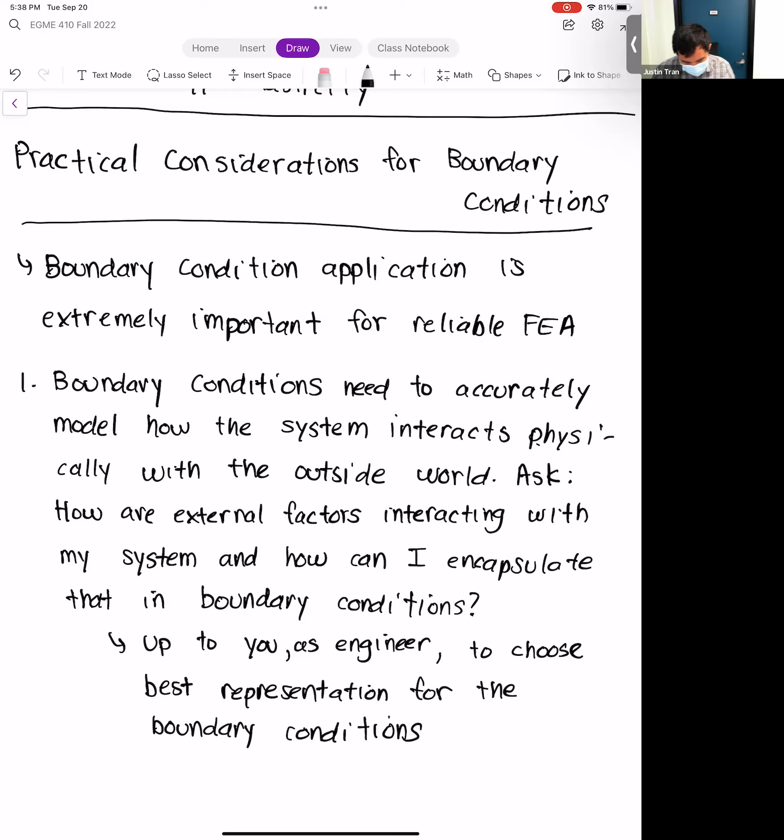This point is really important, and I want to stress this, because you can run a simulation without proper boundary conditions and ANSYS is not going to give you an error. As long as you satisfy the minimum requirements - at least one constraint boundary condition and maybe a load or another constraint - ANSYS will be like, fine, you can run whatever you want, don't worry about it. But you're going to run into a situation where if you apply the boundary conditions incorrectly, your simulation is not going to reflect the physical result.

Those are even more difficult to catch, because ANSYS is not going to tell you that this doesn't match reality - ANSYS doesn't know better, it's just a computer. So it's really up to you, and you have to be the judge of what the best boundary conditions are, and the judge of whether the results make sense relative to the boundary conditions.

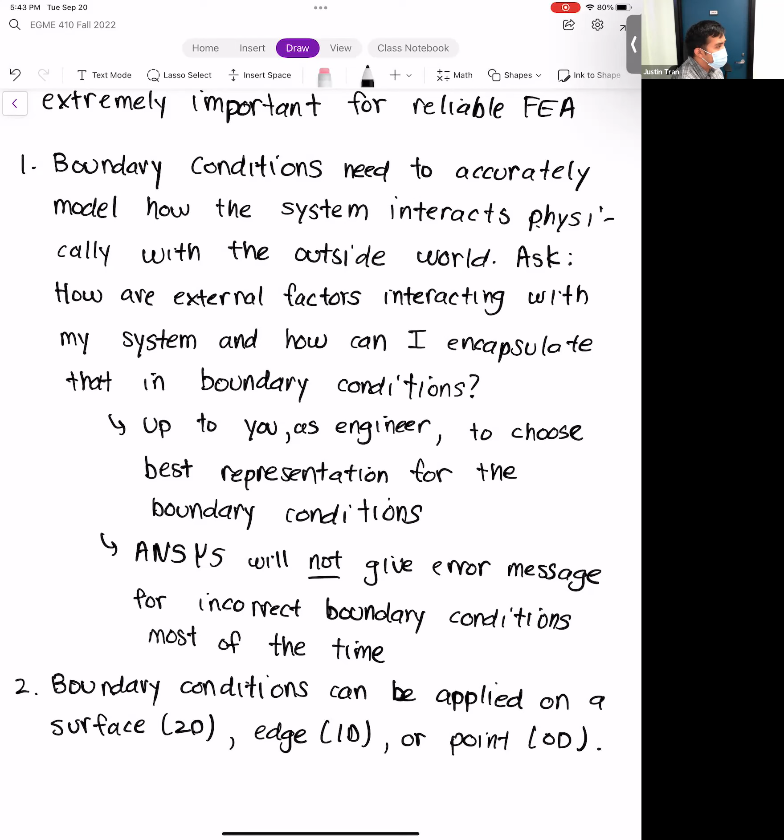That applies to all types of boundary conditions—all the constraint type boundary conditions as well as all the load type boundary conditions. Generally speaking, most of the time you want to apply the boundary conditions on as wide an area as possible. Applying a boundary condition on a surface is preferable to an edge, and applying a boundary condition on an edge is preferable to a point.

Surface is greater than edge, which is greater than point.

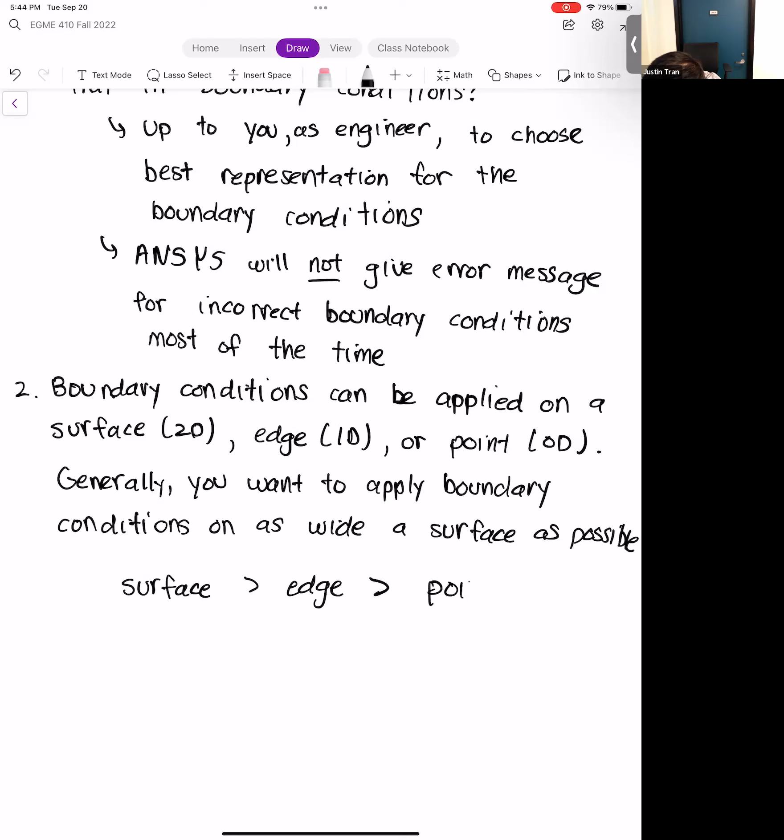The reason for that is a bit hard to get into right now, but basically you get more stable and better quality results if you can apply that over a larger area. That's not to say there aren't situations where you want to apply a boundary condition on an edge or a point—it's just that generally, if you can avoid it and apply the boundary conditions over a 2D surface instead, that's preferable.

All right. And yeah, that's it. Any questions on this?

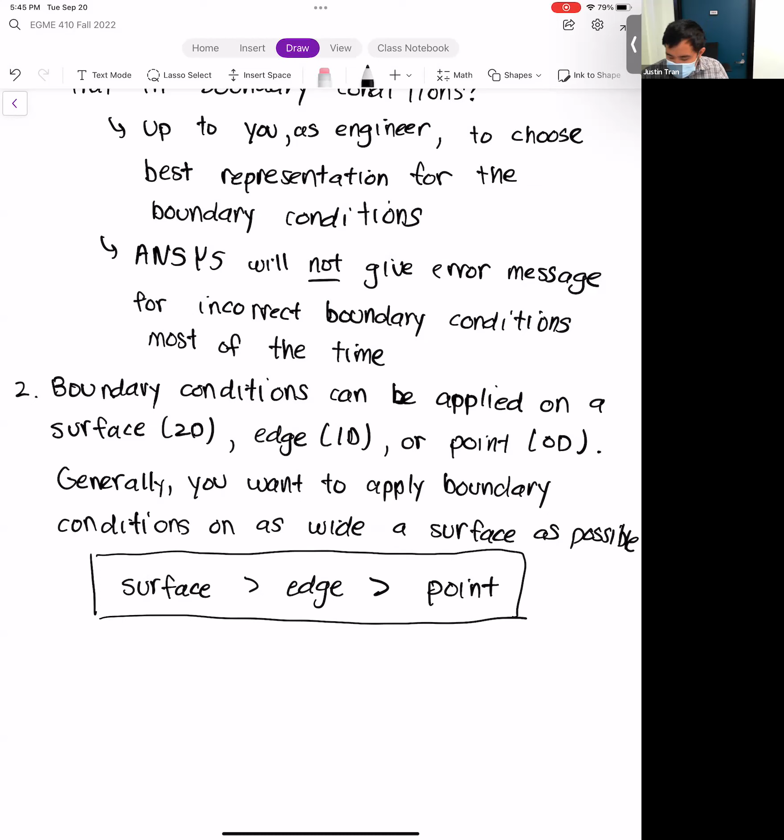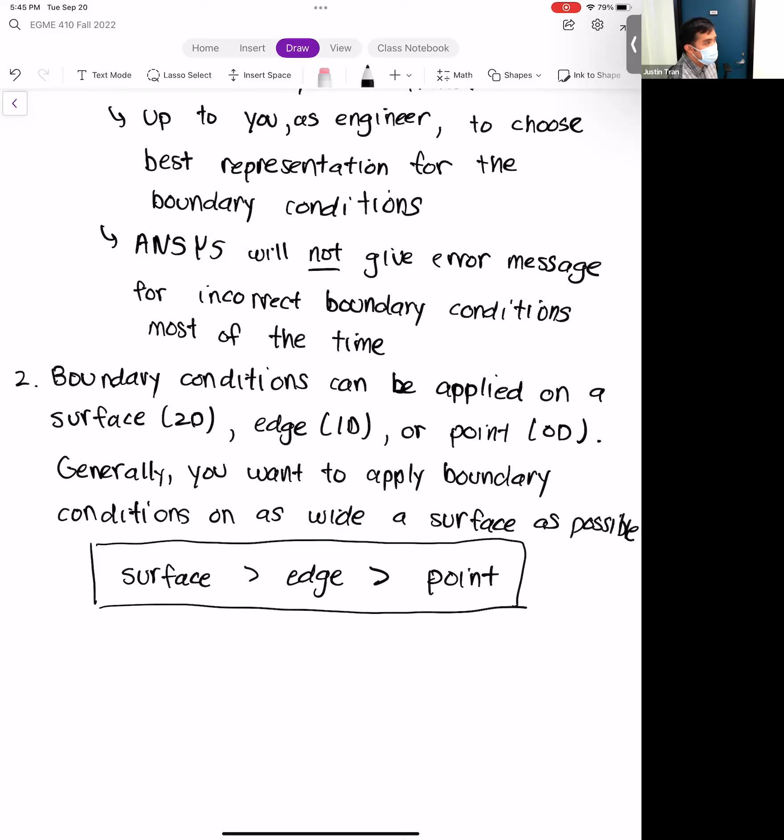I want you to think about these two points, especially when it comes to boundary conditions. For activity 3, I think I tell you what boundary conditions to apply, so it's a bit different than activity 2 where you make it up on your own. But it's still good to think about, because I'll be the first to tell you that in activity 3, the way the boundary conditions are modeled, I wouldn't exactly say they're the best considering what they're meant to represent—especially things like weights or the wind force. I think there are better ways to do that, so definitely think about these as we do activity 3.

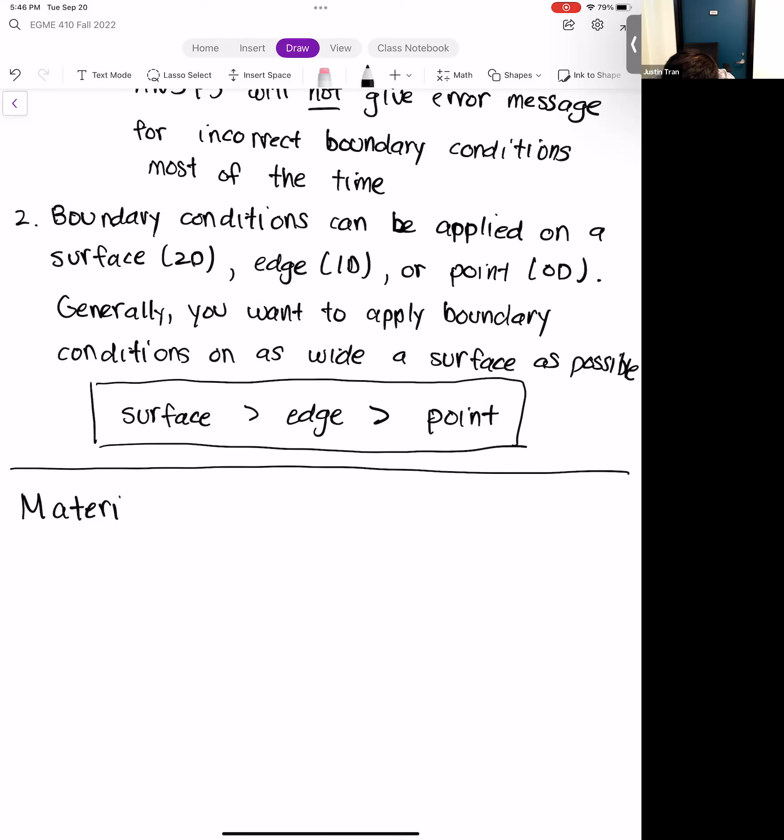All right, so the last piece of the puzzle, in terms of ANSYS basics that you should know for every kind of ANSYS job, are material properties. We've talked about material properties a bit before, but I want to formalize it into a lecture so we can discuss some of the finer points and more nuanced aspects, especially some of the alternate material models that are out there. Even though we're going to mostly be working with linearly elastic isotropic materials, I want to make you aware of some of the other tools out there in terms of material properties.

All right, so first let's define them. Material properties refer to the physical parameters of the material that affect how it responds to physical loading.

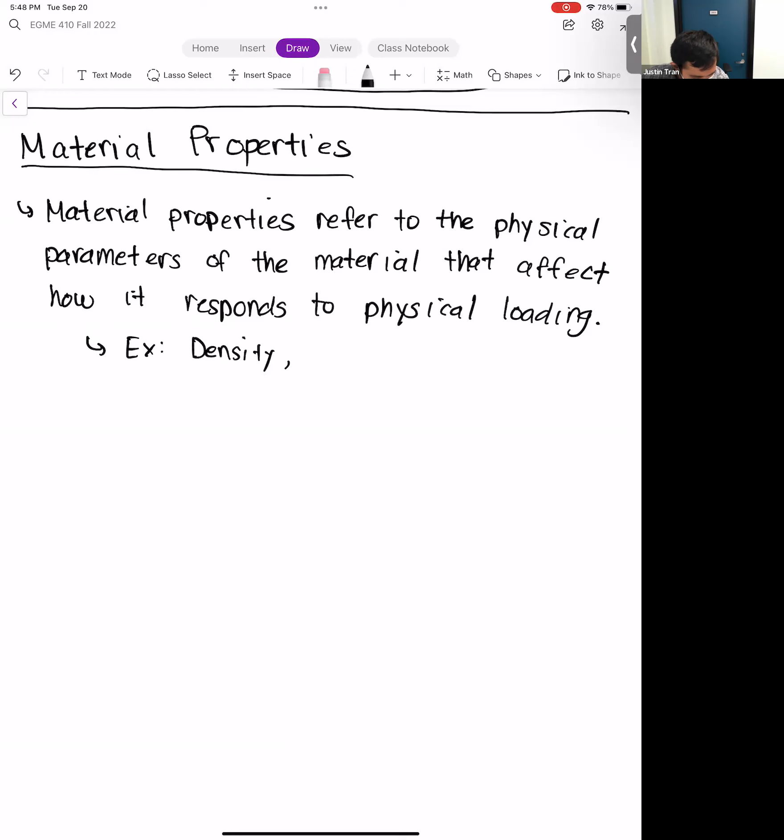It's important to distinguish that when I talk about material properties, I mean properties that are inherent to the material itself. Usually these are called intrinsic properties, which are properties that don't change depending on how much mass or volume you have of something.

One example of this would be the difference between mass and density. The density of a pound of aluminum is going to be the same as the density of 1,000 pounds of aluminum, because density is a property that's intrinsic to aluminum itself. Whereas the mass of a pound of aluminum is going to be very different than the mass of 1,000 pounds. These are properties that are intrinsic to the materials and don't really have to do with the shape, geometry, or amount.

Mathematically, the reason we need to input these properties for finite elements is that material properties are used in the governing differential equations. Things like the density, the Young's modulus, and the Poisson's ratio all enter into the governing equations. And thus, as ANSYS solves the governing equations, the material properties are going to affect the solution.

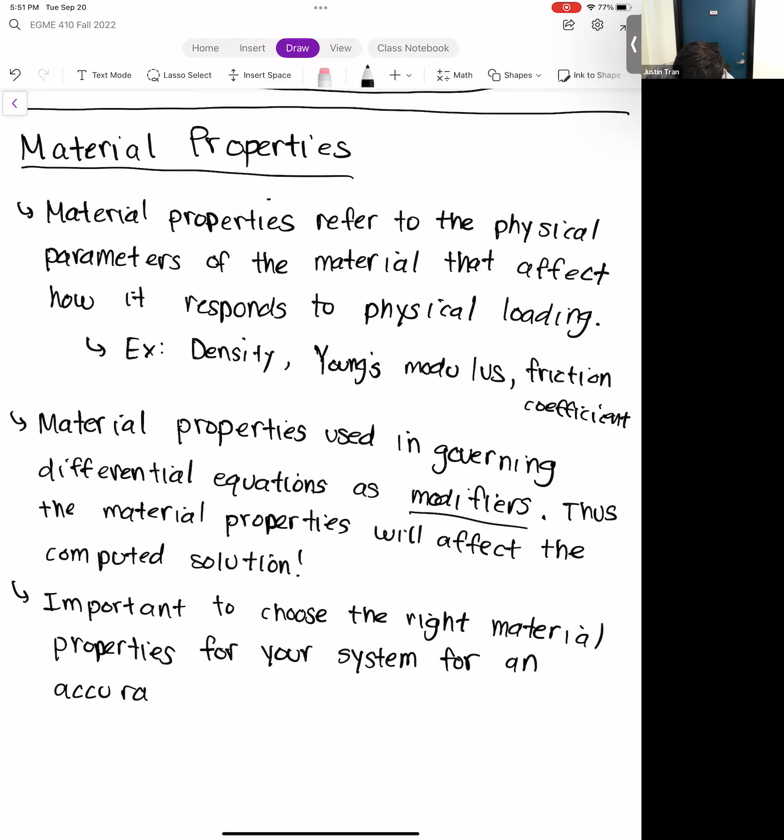We haven't done too much with material properties yet in our first two activities. For our first activity, we just used the default one in ANSYS, structural steel. And in the last activity, we just input a very simple metal, aluminum 6061. But material properties actually goes a lot deeper than that. When I say choose the right material properties, it's a lot more than just choosing the right Young's modulus and the right Poisson's ratio, because that's the simplest material you can have. In addition to choosing the right property values, you also have to choose the correct, most physically realistic material model.

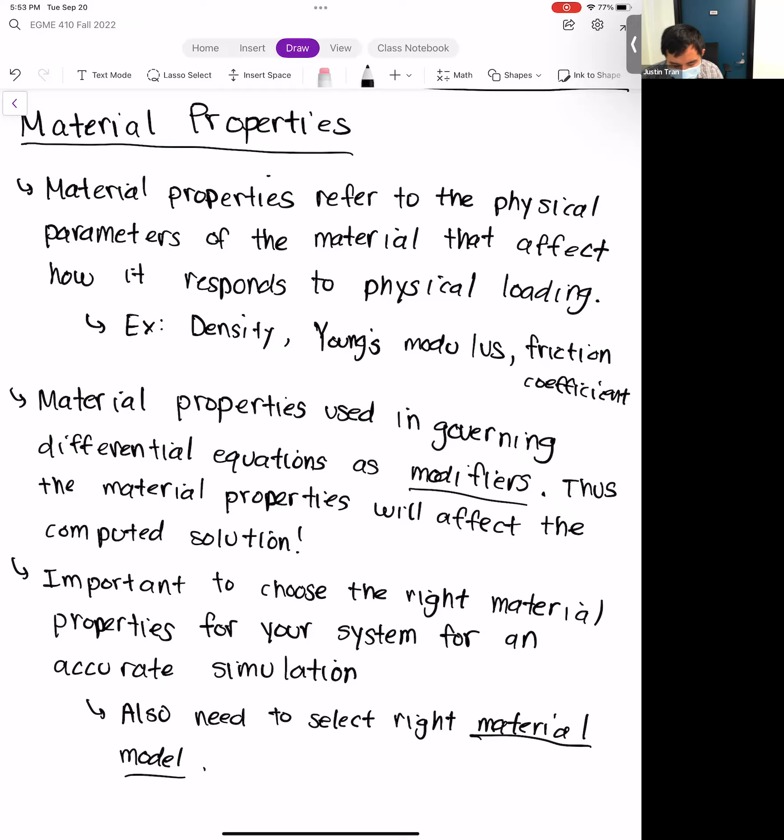We'll talk a bit more about what material model means, but basically there are different mathematical representations for how to model or capture a material's behavior. We've talked about linear elasticity quite a bit in this class, and that's one such material model, but there are others out there. For this class, we're going to talk about things like anisotropy - an anisotropic material - we'll talk about plasticity, and probably something you may or may not have heard of called hyperelasticity as well, which is another type of material model out there.

If you really want an accurate simulation and your system's going to be exposed to adverse temperatures, either very high or very low, it's important to capture those temperatures as well. It's actually very common to run a thermal simulation right alongside a structural simulation, so you can have those dynamic changes in temperature, and those will actually change the material properties in real time as well. That's something that's used quite a bit.

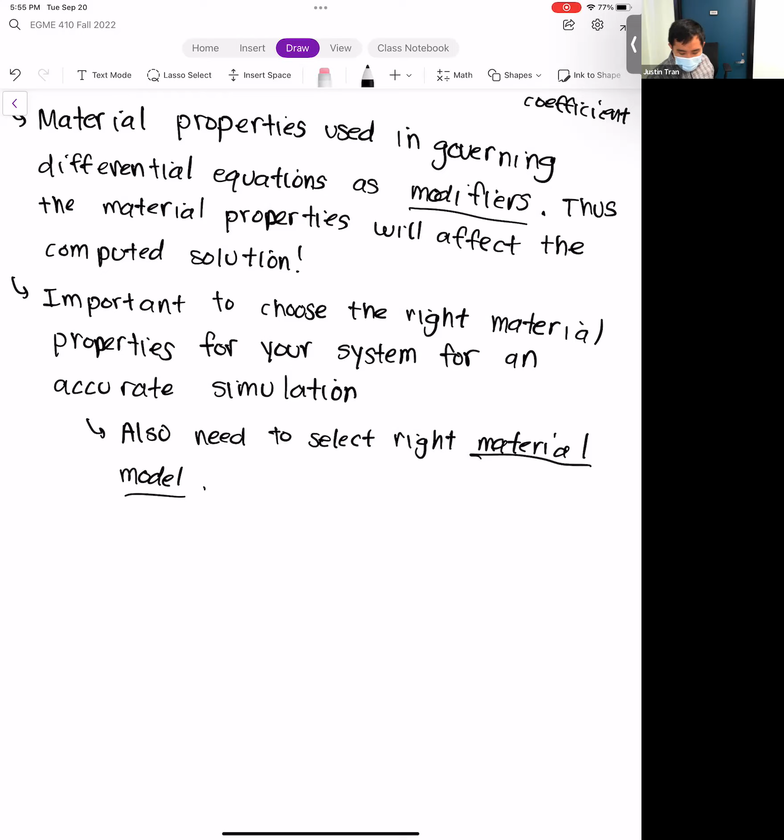Any questions on this?

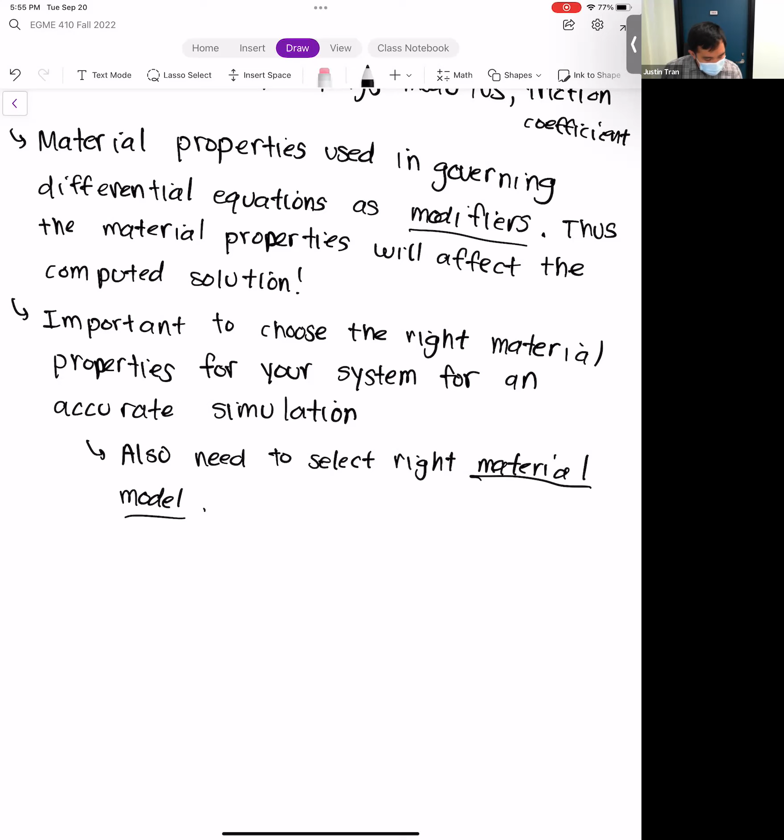All right, so let's start going over the different material models and what you need to specify for each of them. Let's start with our favorite one, the one we'll be using for most of this class: linear elasticity.

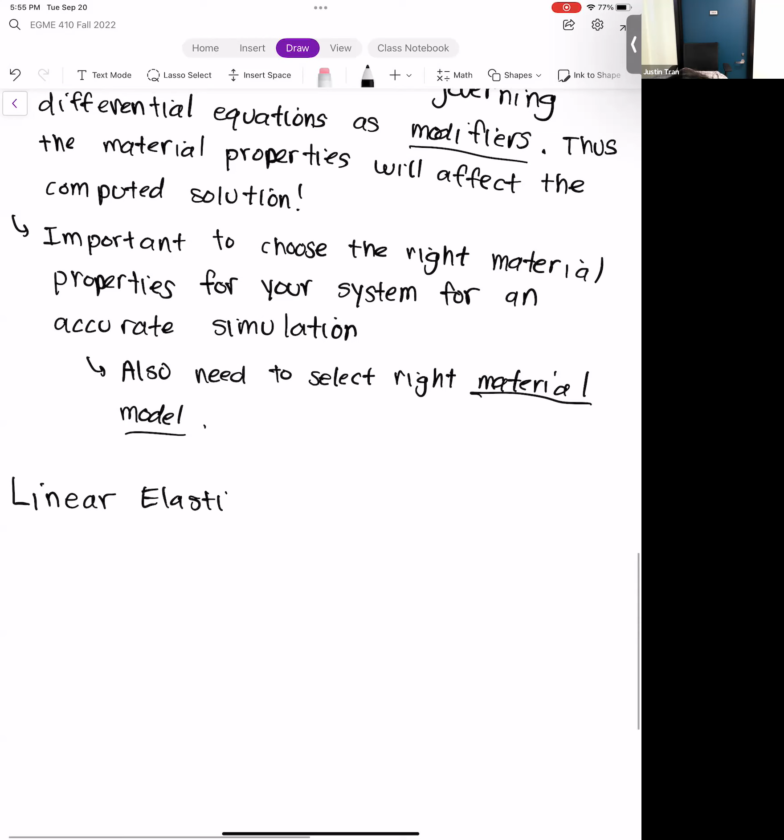Linear elasticity—I think this may be the third time we've talked about this in this class—refers to materials where the relationship between stress and strain is purely linear. It's the simplest one out there, and that's kind of why we use it. In terms of the number of parameters you have to specify, linear elasticity has the smallest requirements.

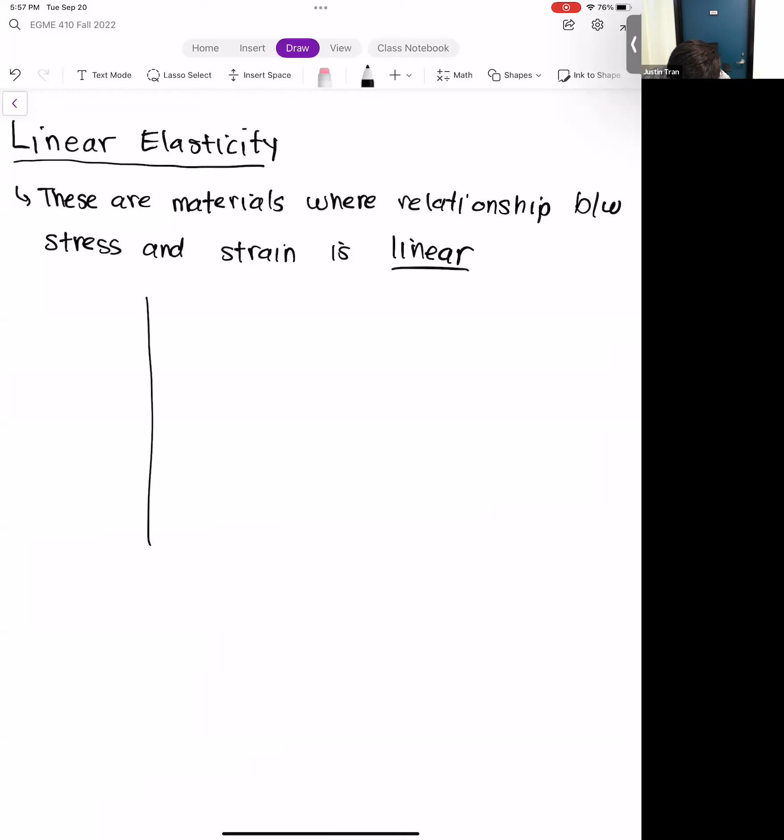Graphically, let's go ahead and draw the graph. You've probably seen this a million times now, but a linear material model looks something like this: we have stress on the y-axis, strain on the x-axis, and the relationship is just a line like that. The slope of this line is the Young's modulus, E.

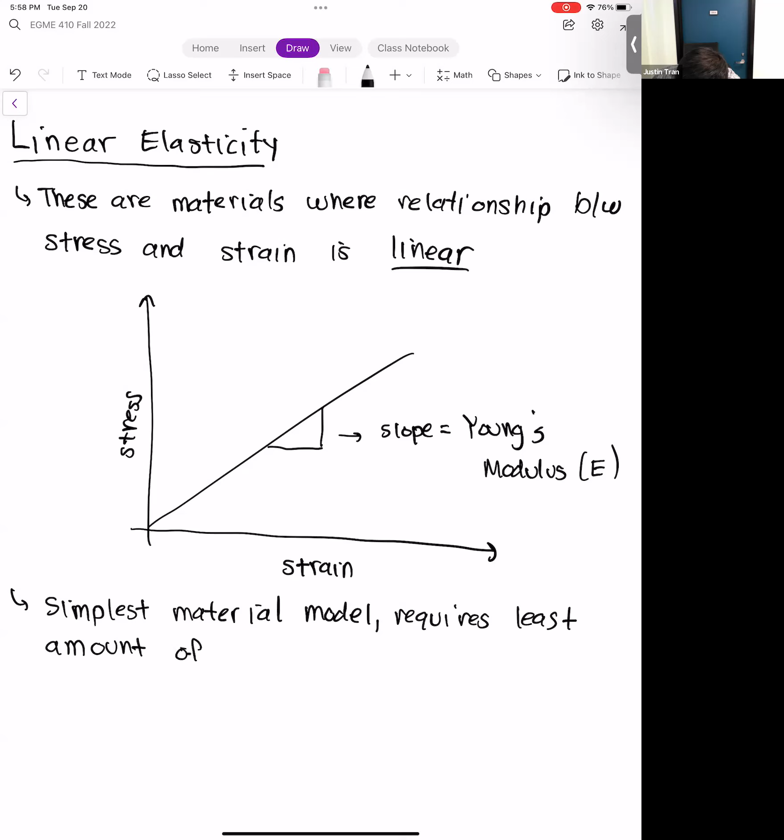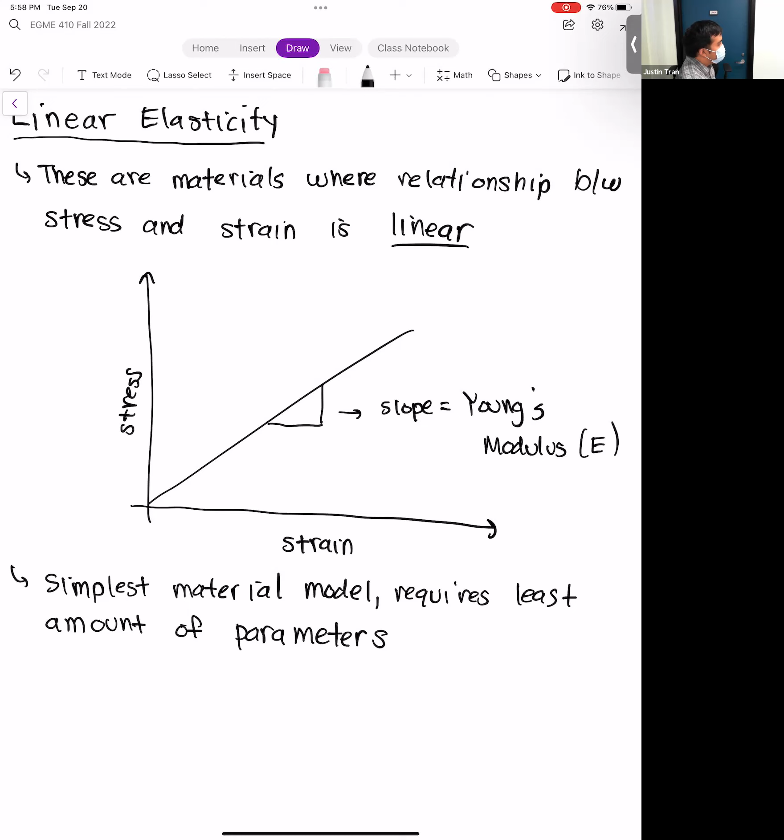Like I mentioned, it's a popular one to use, especially when you're first learning ANSYS and first learning about structures, because it's the simplest. You really only have to specify two different material parameters, which we did in Activity 2. Let's go over what those parameters are and what they represent.

So let's do the Young's modulus first. The Young's modulus is E. Just like I mentioned above, the Young's modulus is the slope of the stress-strain curve, and what it represents is how well the material can resist deformation.

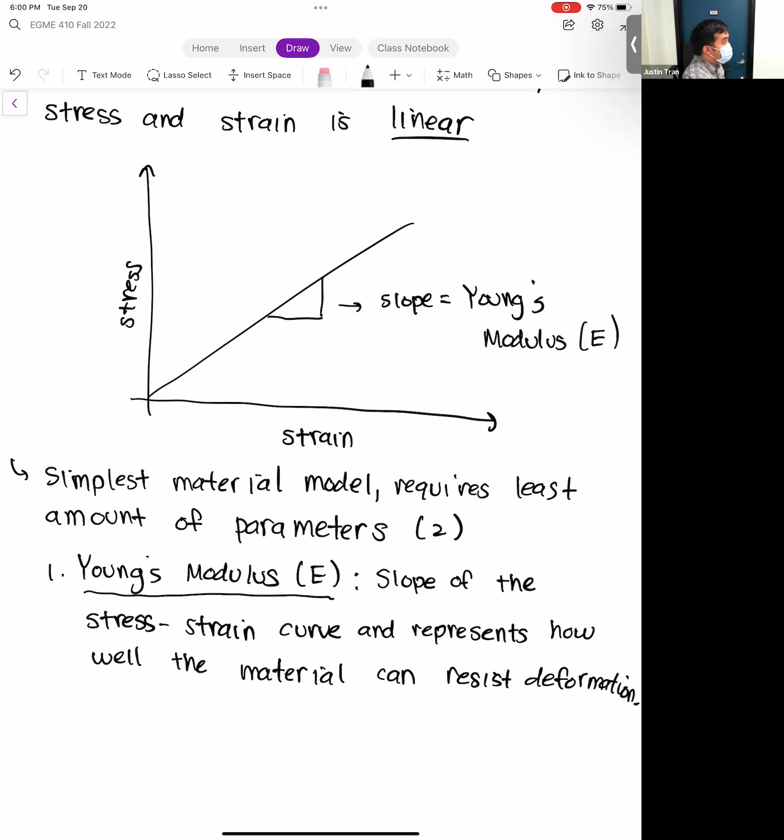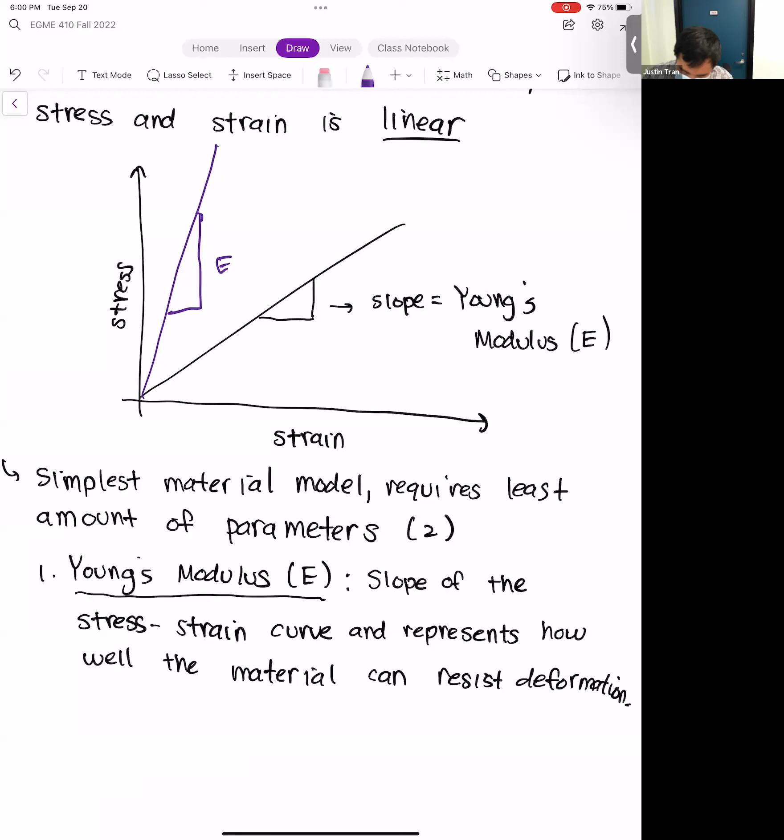We use the Young's modulus as a measure of material strength. A material with a higher Young's modulus we associate with being a stronger material. Intuitively, if you look at the graph, if you have a material with a much higher slope—let's say we have a material with a relationship like that, where the slope of this line is much greater than the black line—that means in order to cause a similar amount of strain, you're going to need a much higher amount of stress, and much higher stress means more load or a higher amount of load. So if you have a higher Young's modulus, that means you have a much stronger material.

As an example, using two metals you're probably familiar with: steel we generally regard as a very strong material, and steel has a Young's modulus of about 200 gigapascals. Whereas copper, we all consider to be a much softer material, has a much smaller Young's modulus of about 130 gigapascals. Generally, when you're thinking about the strength of the material, how well it can resist deformation, we rate that based on the Young's modulus. Any questions on that?

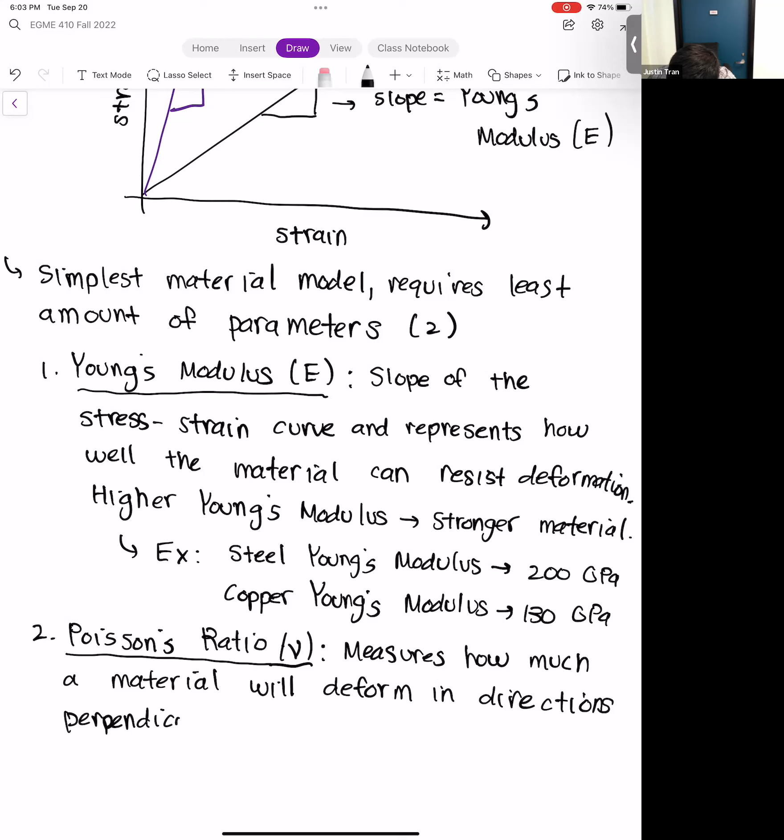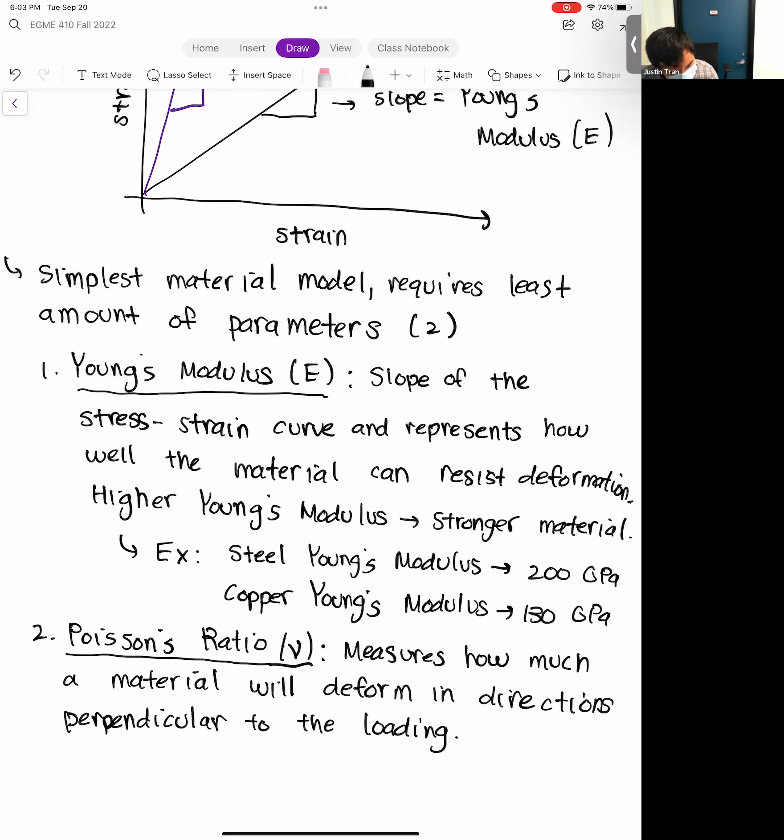Because oftentimes, when you have a 3D part or a 3D geometry and you apply some loading in one direction, because of conservation of mass, you're going to have deformation in directions that are perpendicular to it. I'll draw a picture to explain that in a second.

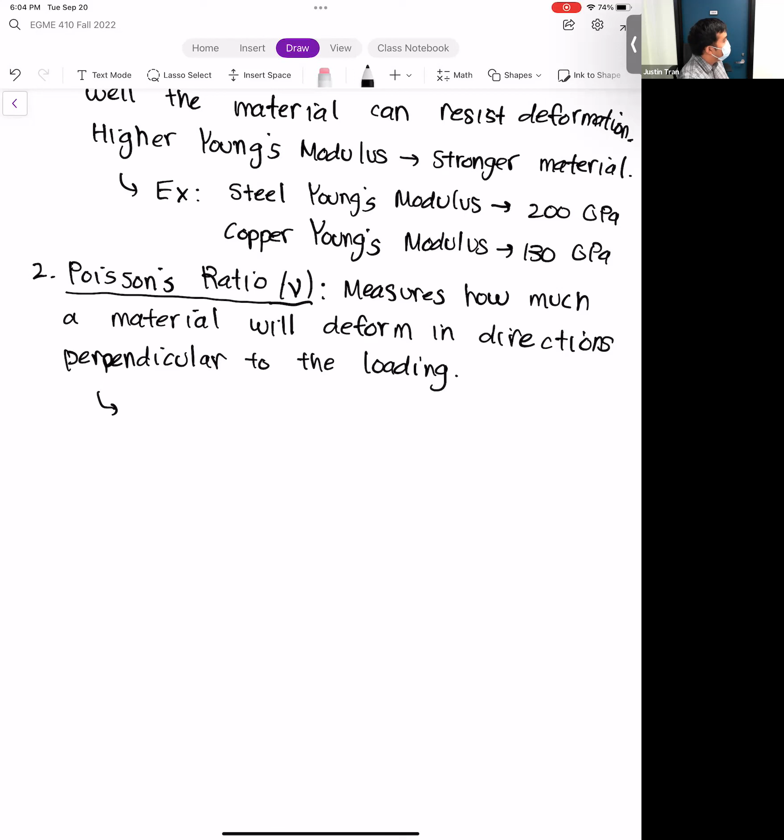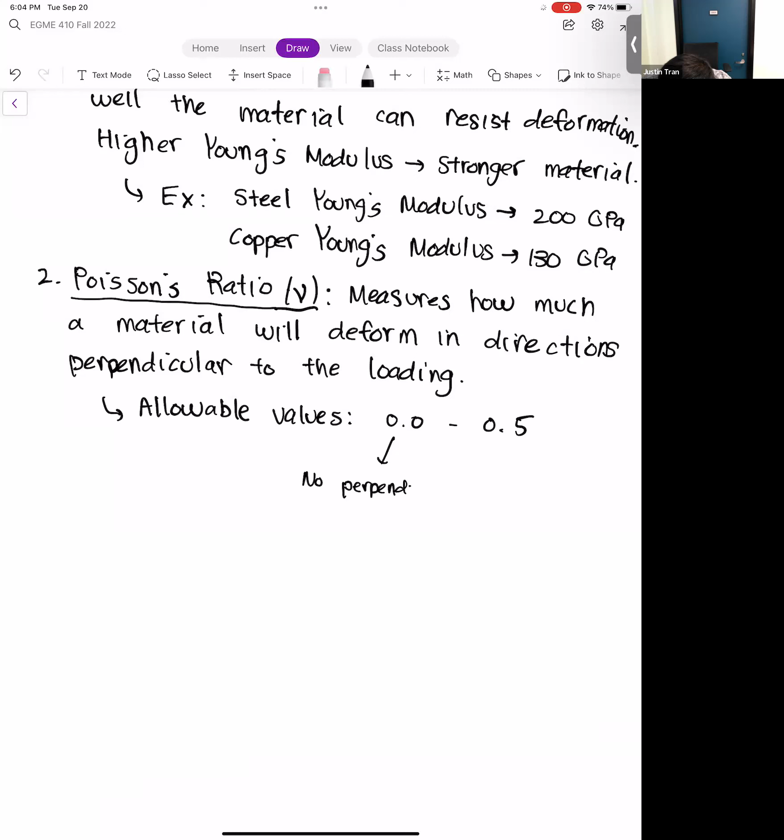But let's define the units for Poisson's ratio. First of all, there are no units, since it's just a ratio, so it can be something between 0 and 0.5. If you have a Poisson's ratio of 0, this basically means that you have almost no perpendicular deformation, whereas a value of 0.5 means lots of perpendicular deformation.

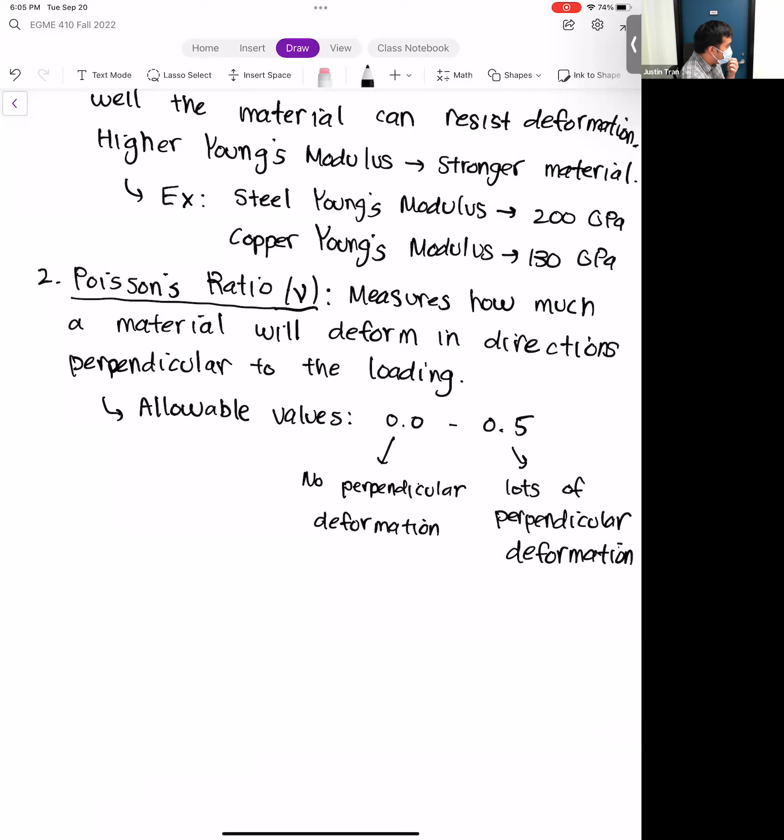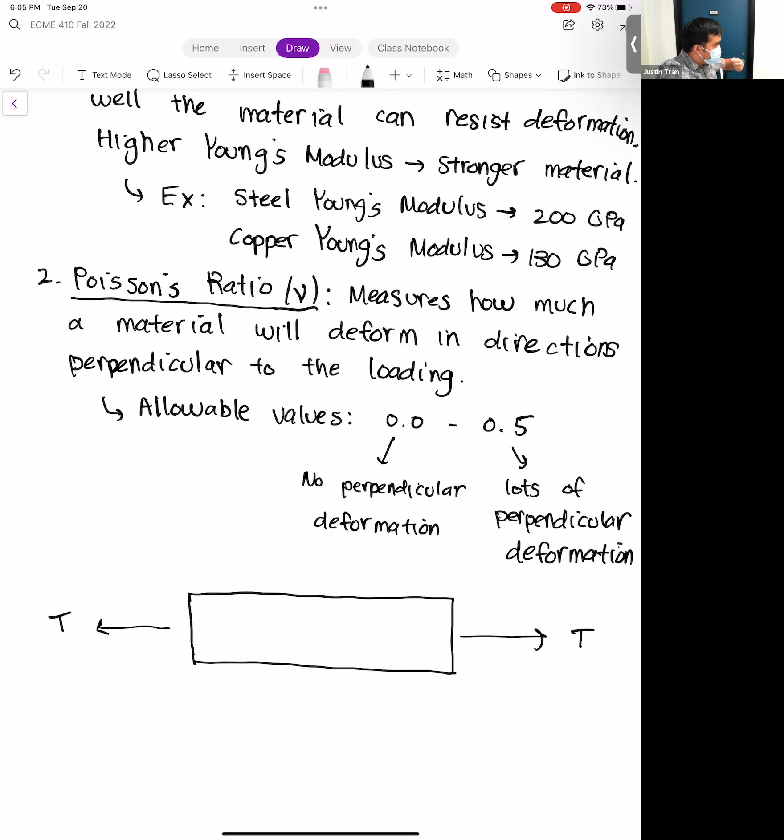Okay, so let's do a quick illustration of this. Let's say that we have a bar, I guess it's a rectangle. Let's pull on the bar in tension, so we're taking our bar and just kind of pulling it apart, similar to our first activity. So what we generally expect is that after we apply this force, because the force is tensile, then we expect our rectangle here to elongate.

So we have an elongation due to loading. The elongation is a deformation that's in the same direction, or parallel to the loading, because the loading is going left to right here, and elongation means deformation in that same direction. But in order to satisfy conservation of mass, what needs to happen is that there needs to be some deformation perpendicular to that occurring as well.

You can't just stretch a piece of material and expect it to stay the same width, because otherwise that's going to violate conservation of mass. So to compensate for the fact that the overall length is getting longer, parts of the geometry are going to get skinnier, to compensate for that loss of mass. The degree to which you see the material get skinnier, and how localized it is or not, depends on the Poisson's ratio.

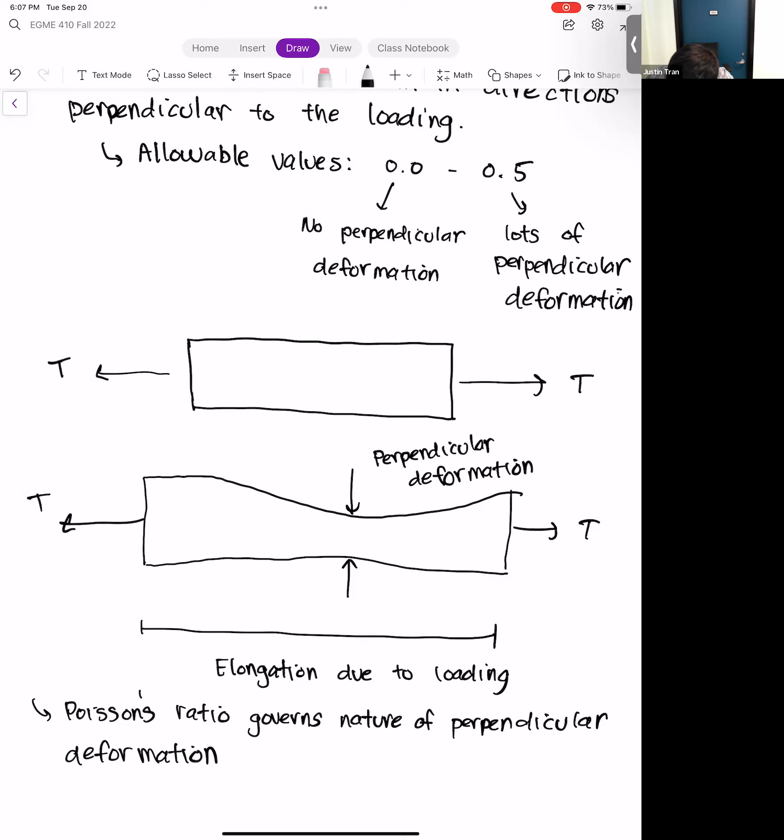Okay, so that's Poisson's ratio there. All right, any questions on Poisson's ratio?

Would a material with a Poisson's ratio of 0 still be able to elongate? That's a great question, and that would be probably a better question for one of the other structural faculty.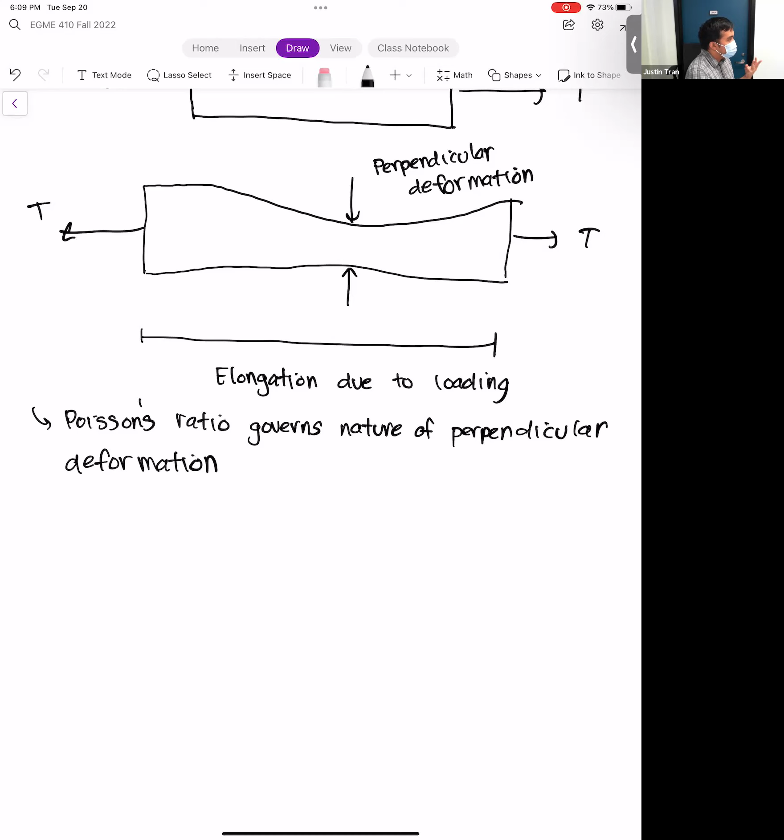All right, so those are the two main properties that you have to specify. If you think back to activity 2, when we were specifying the material properties for aluminum, these are the two that we specified. There's actually a third material property for linear elasticity that no one really talked about—it's like a forgotten cousin—and that is called the shear modulus.

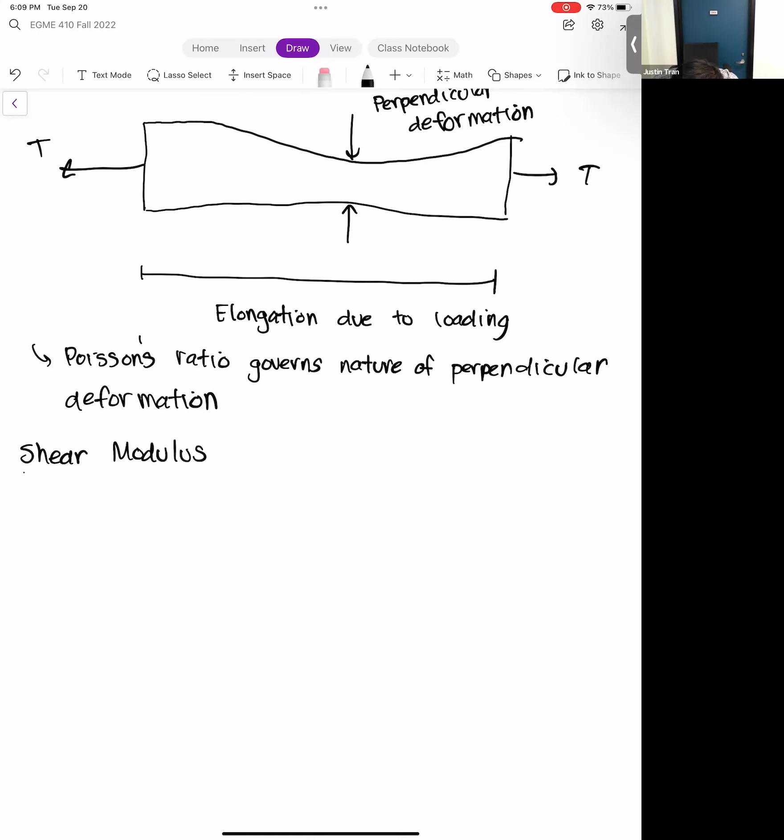So the shear modulus determines how strong the material is, or how much the material resists shearing deformation.

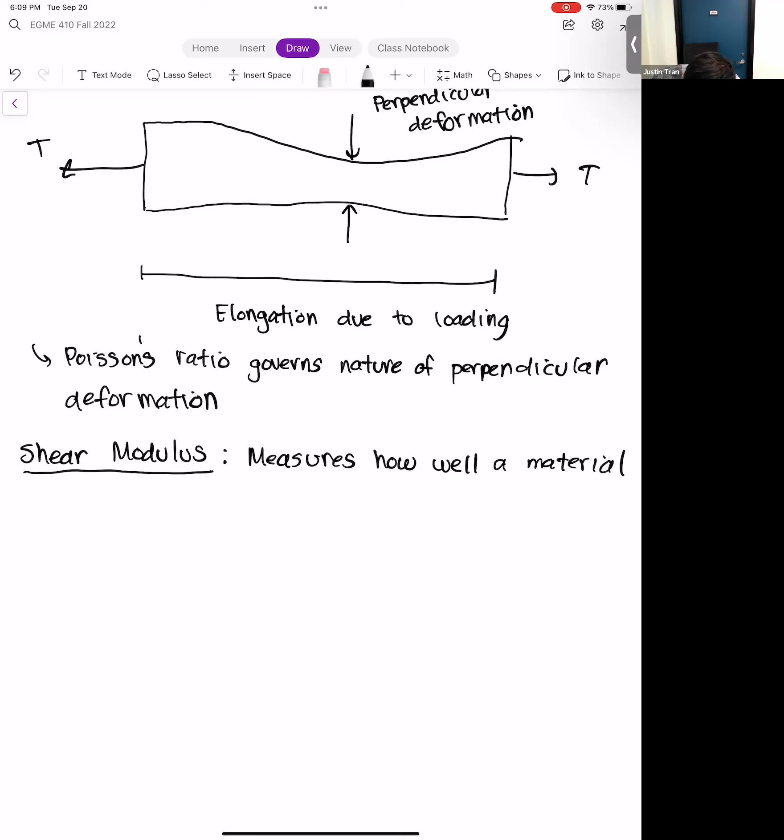Once again, because we're working with three-dimensional objects most of the time, there are certain situations where our materials will be loaded in shear. The shear modulus tells you how well the material can resist shearing forces. The reason we don't really talk about the shear modulus too much is that if you have an isotropic linear elastic material, you can compute the shear modulus based on the other two properties.

Okay, and so the symbol for shear modulus is G. And G is computed as E, which is the Young's modulus, divided by 2 times 1 plus nu, the Poisson's ratio.

Some of you might have noticed this when we did activity 2. When we were specifying the material properties for the aluminum, we only did the Young's modulus and the Poisson's ratio. There was actually another entry there for the shear modulus, if you look a couple rows down. But what you probably saw is as soon as you entered the properties for the Young's modulus and the Poisson's ratio, the shear modulus gets automatically calculated based on that formula. So because this formula exists, we only have to specify E and nu.

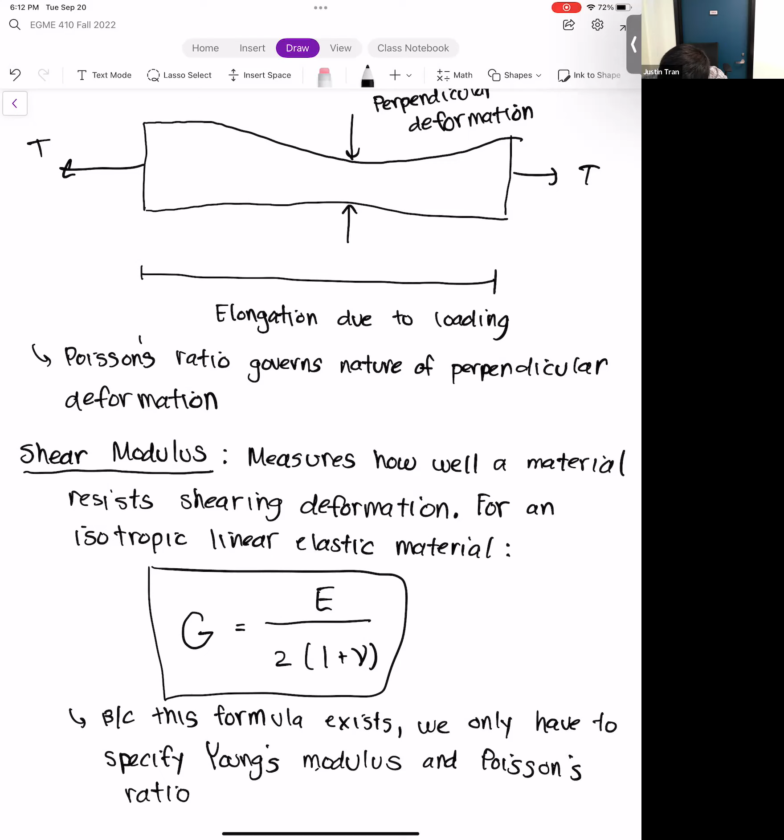All right, so those are the main parameters that are needed for linear elasticity. We spent a bit of time talking about them because it's good to understand these, because for most of the activities in this class, of course for the project you're free to do otherwise, but for at least the activities, we're mostly going to be working with linearly elastic materials. So it's good to understand what the material parameters actually physically mean.

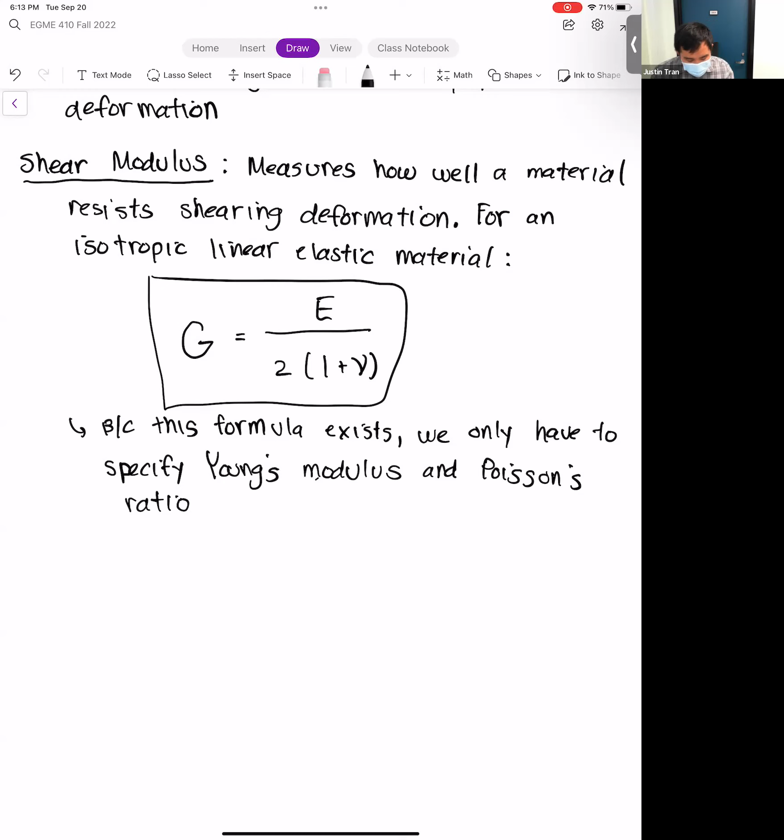Next, let's start talking about the differences between isotropic, orthotropic, and anisotropic. I mentioned isotropic just in the line above when I talked about that formula, but what does it mean? Isotropic basically means that the strength of the material is the same in all directions. In other words, it doesn't matter which way you load it, you're going to observe the same strength of the material.

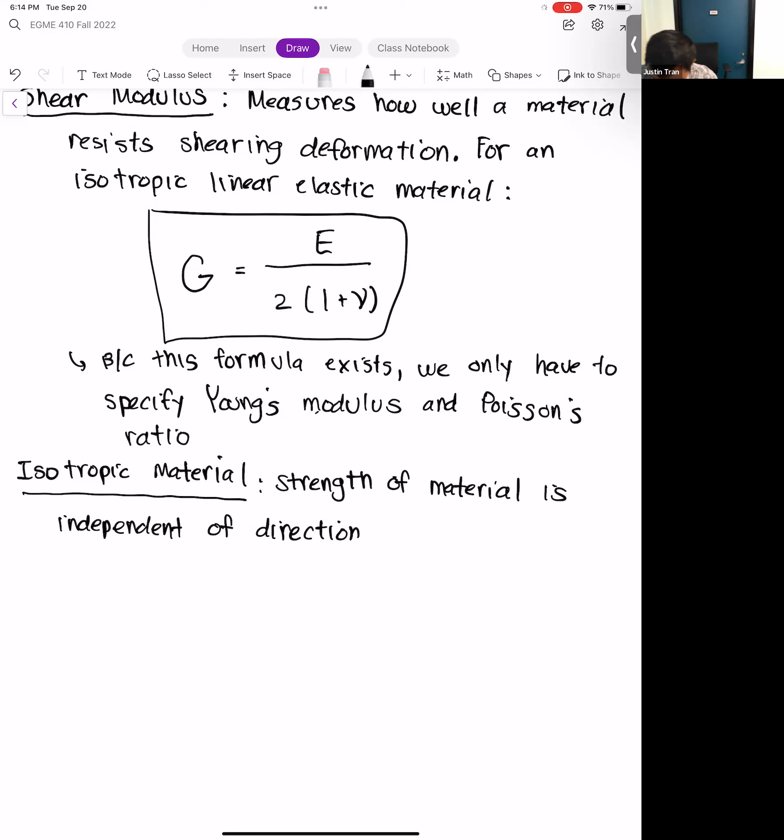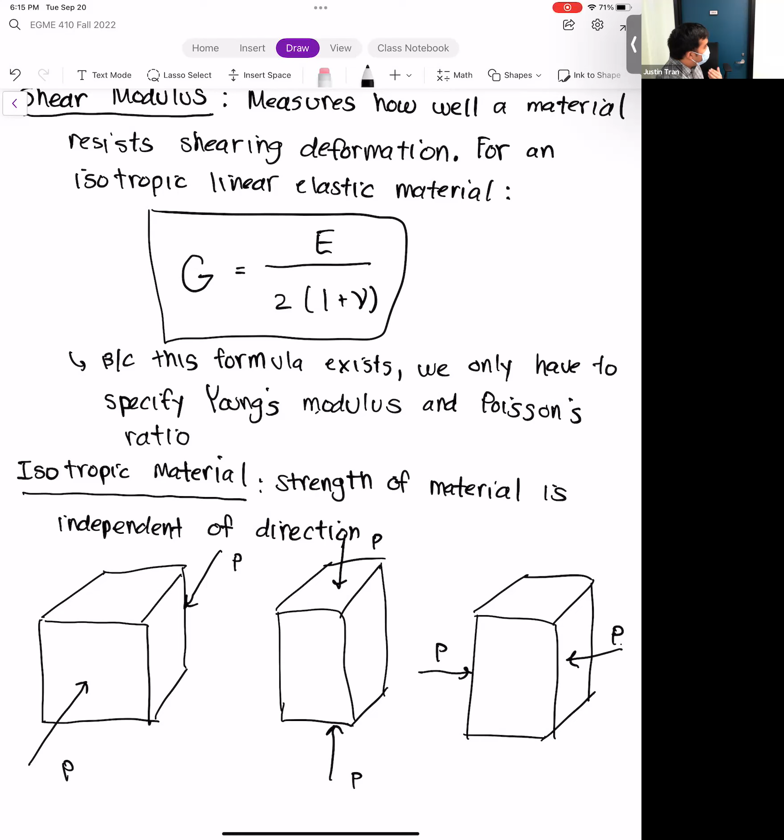Let me draw some examples here. Let me draw a cube. Cube 1, cube 2. Use your imagination and pretend all 3 cubes are identical, I know I didn't draw them up but that's besides the point. For an isotropic material, that means if we load this cube this way, or if we load this cube this way, or if we load it this way, we're loading the cube in 3 different directions. But if we assume that the load magnitudes are the same, so we have a load of P for each of those directions, then we're going to experience the same amount of strain, the same deformation. All perfect cubes, yes, they should all be perfect cubes.

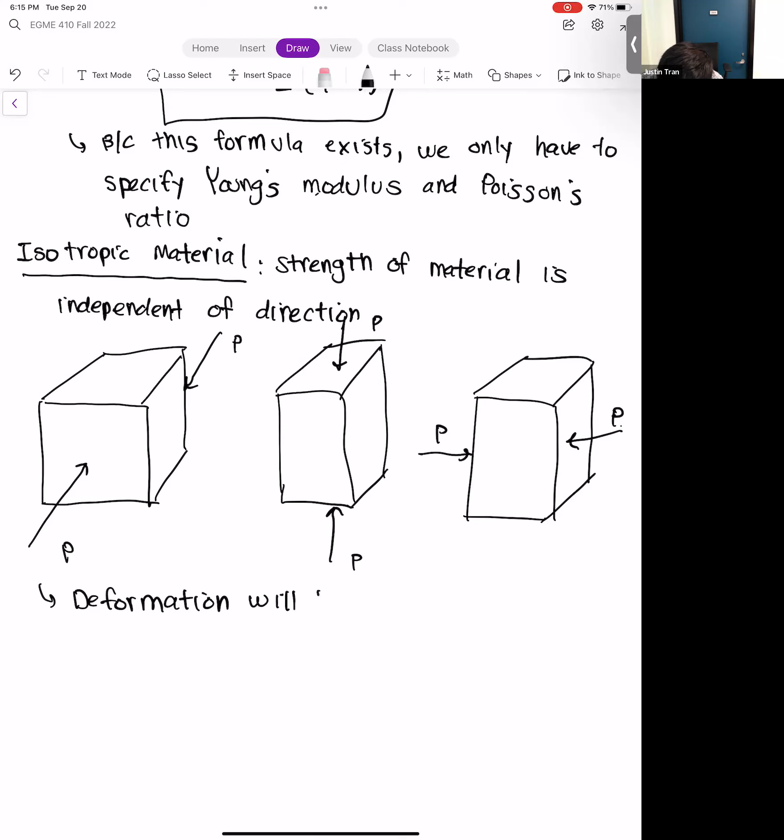I picked a perfect cube because you can kind of just rotate it either way, and so if you load it in this direction versus this direction, you just have to rotate the cube, and you get literally the exact same deformation field. But the isotropicness doesn't depend on the shape of the material either. It just measures the strength of that material in each direction.

This is the reason why, for the most simple linearly elastic material, we basically just specify one strength parameter, and that's just the Young's modulus.

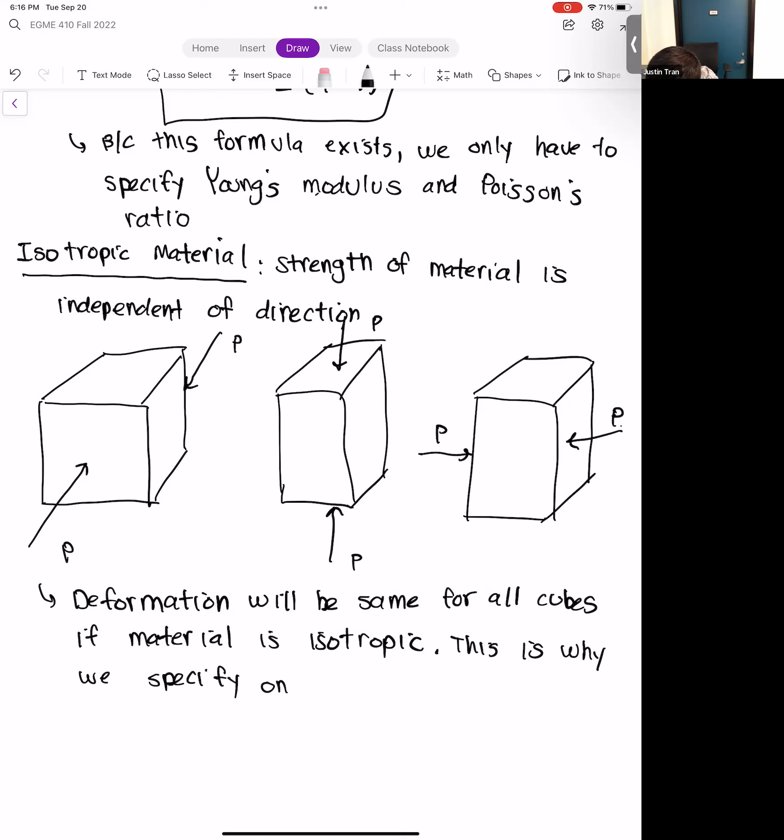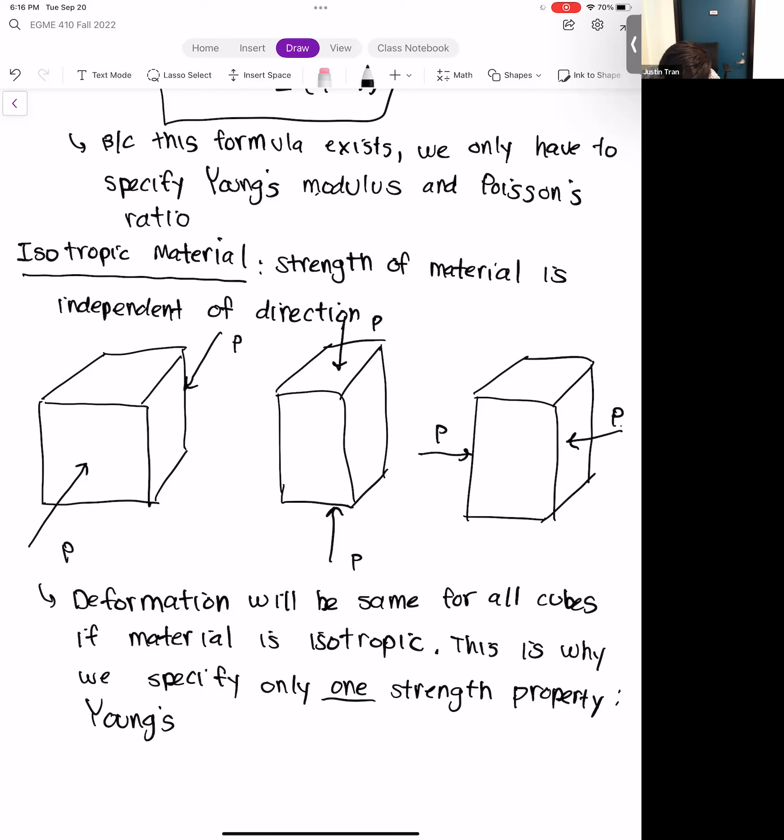And so for an isotropic material, you only need one parameter to describe the strength, and that's the Young's modulus. What that's basically saying is that the Young's modulus will describe the strength in every single direction. I'm showing you 3 directions here, X, Y, and Z direction, but that applies to all the oblique directions too. So if you squish the cube diagonally, or you squish the cube diagonally the other way, you're still going to observe the same strength because it's just one Young's modulus that's working for all of them. So when we can work with an isotropic material, it's the simplest that we can do, and we generally like doing it because it's the simplest.

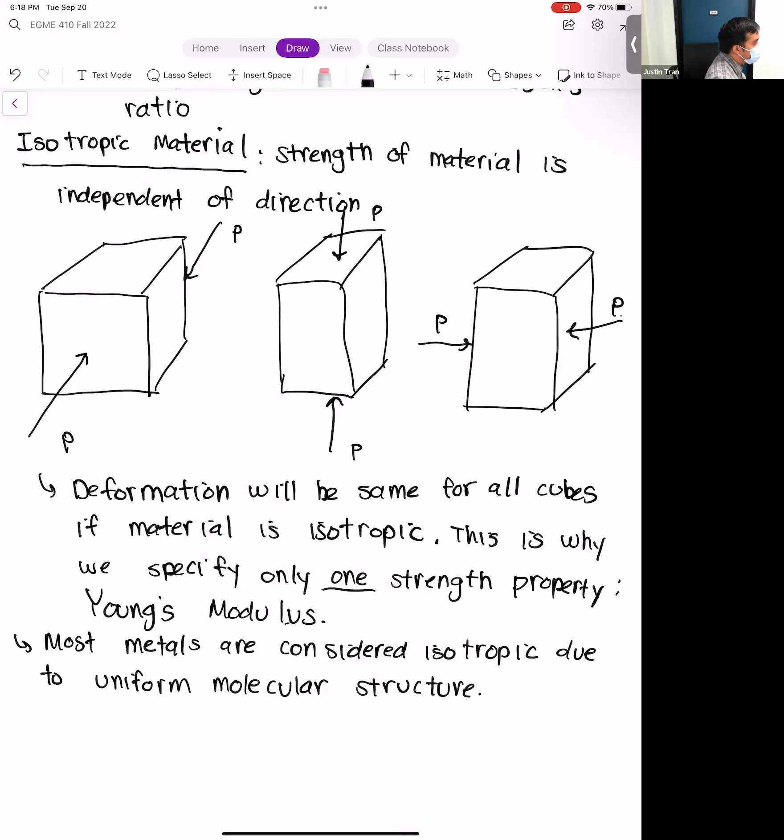So when is it appropriate to use an isotropic material? Most metals are considered isotropic materials, and that's a direct result of its molecular structure. If you know a bit about how metals are molecularly organized, all the molecules are organized very, very orderly, right next to each other in perfect little lines and perfect order. Because of that, you get the same material properties no matter what direction you go in. That's great for us because metals are a very common engineering material, they're relatively cheap and they have a lot of strength for their cost, and they're relatively easy to machine too compared to some other materials.

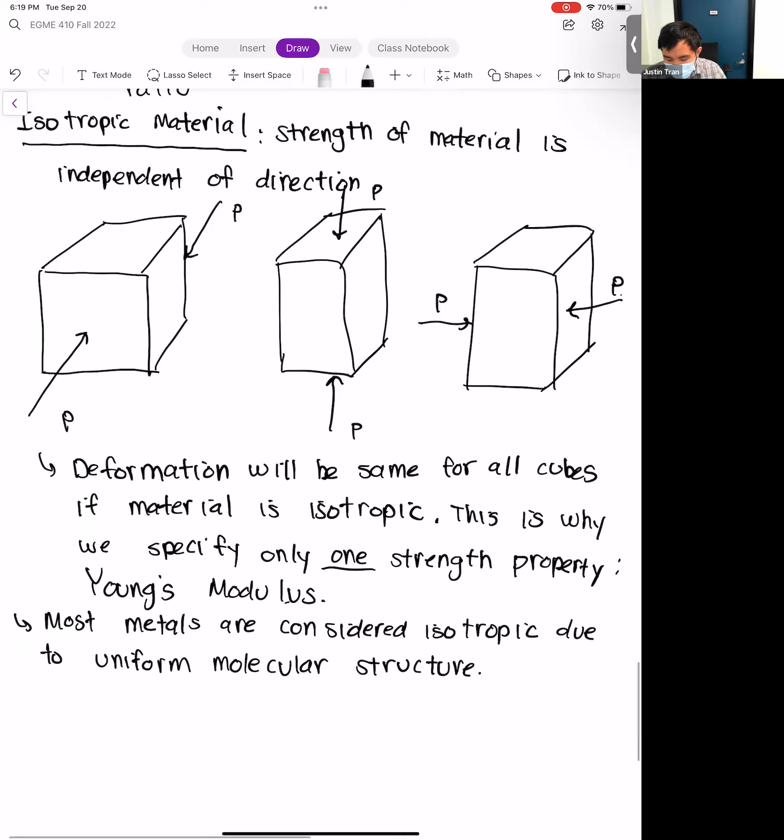Any questions on isotropic materials here? All right, so what are the other types of directions that are out there? There are ways that we can model situations where the strength is unequal in each direction.

So one material that we talked about earlier in this class is wood. Wood is a very famous kind of non-isotropic material because wood has these grains running through it. Depending on which direction the grains are running, that's going to alter the strength of the wood. So the question is, how do we actually model this within ANSYS, and how do we input different strengths in different directions?

Well, there's a lot of options for it. There's way more options than we can cover in just one lecture, but I do want to mention the two more common ones that you can use.

All right, so the first type of non-isotropic material is orthotropic elasticity. In contrast with the isotropic material, which only had two material parameters we had to specify—Young's modulus and Poisson's ratio—what you see is that if you add complexity in terms of strength in different directions, it's going to require more parameters that you have to specify. Actually, one of the more simpler ones is orthotropic, but even the simpler one requires 9 material parameters to specify.

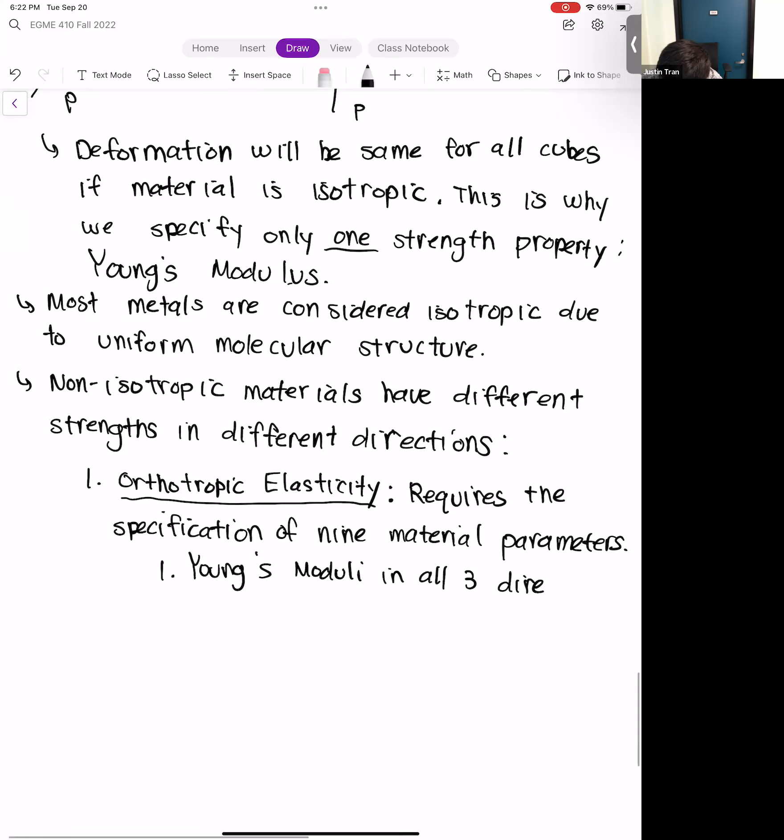First you have to specify Young's modulus, or Young's moduli, in all 3 directions. You have to specify Poisson's ratios in all 3 directions—that's X, Y, and Z. And then you have to specify shear moduli for all 3 directions as well.

So 9 sounds like a lot, but I think by this point we understand what the Young's modulus represents, we understand what the Poisson's ratio represents, we know what the shear moduli represent. So now you just have to specify them for each direction individually. Orthotropic elasticity is a very popular choice for modeling woods.

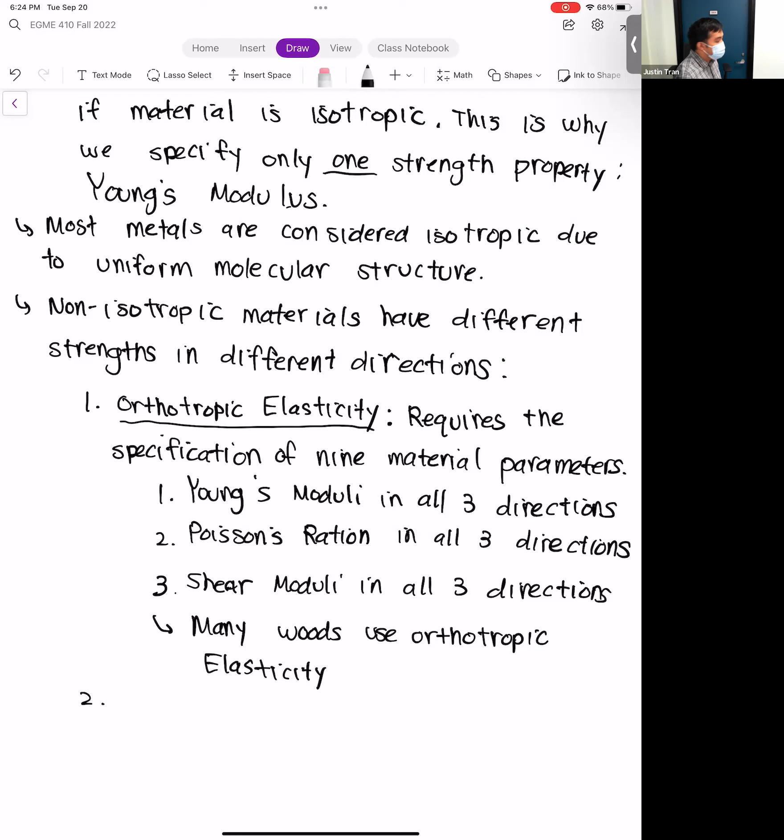And so the other material model that I want to go over is the anisotropic material. The anisotropic material model is probably the most inconvenient material model to use, but it also gives you the most flexibility. With orthotropic elasticity, we made a big jump from 2 parameters to 9. For anisotropic elasticity, we're going to make another big jump, going from 9 parameters to 21 material parameters.

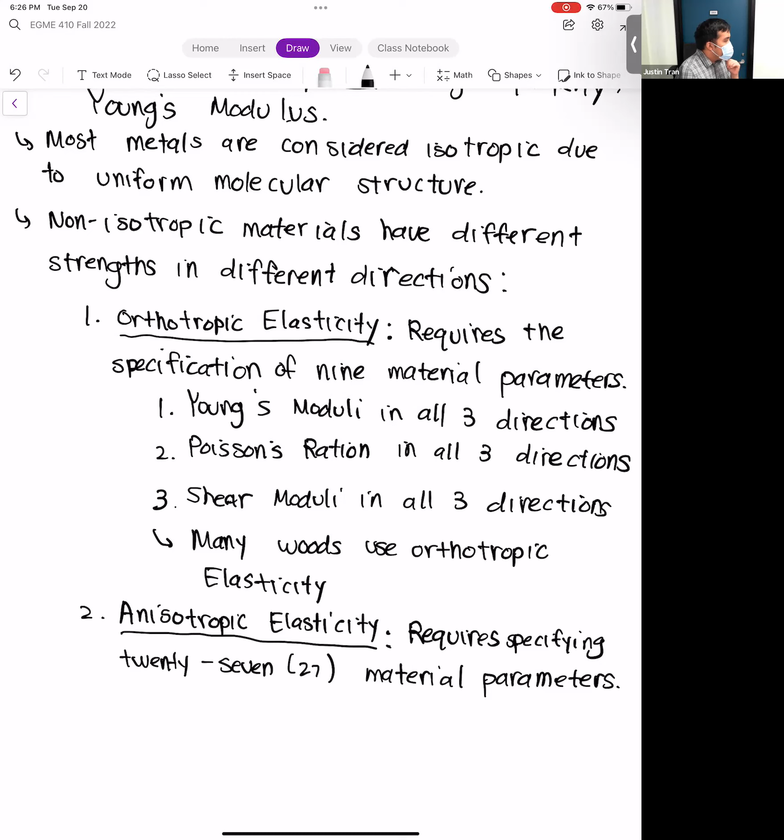So anisotropic materials are kind of for the materials nerds, who like to modify every little detail. The reason there are so many of them, and a lot less in the other material models, is that anisotropic elasticity makes no assumptions on symmetry.

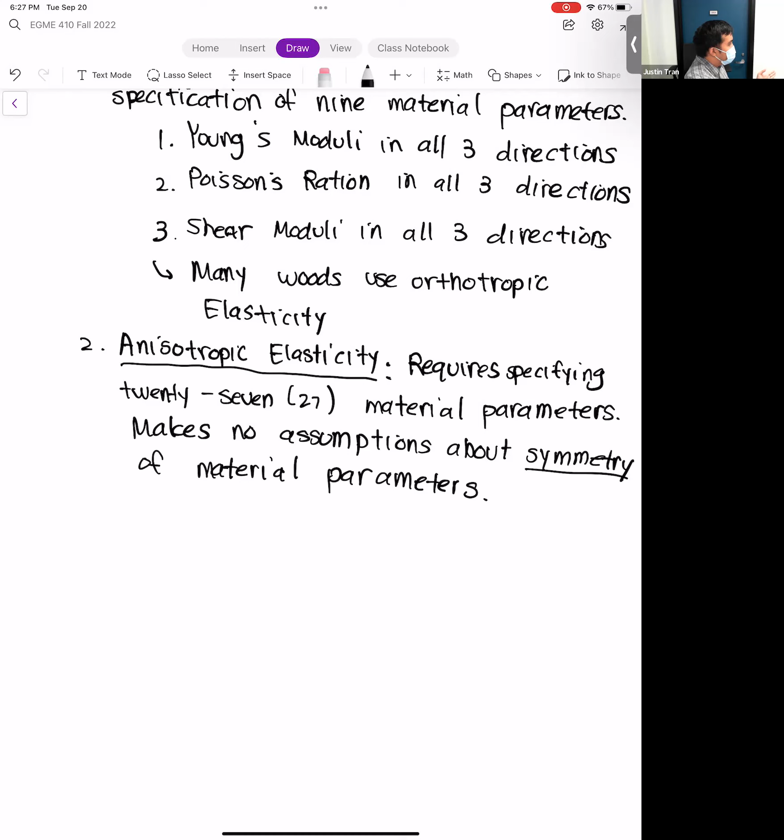It's a little bit hard to get into a discussion of what symmetry means in terms of material parameters without probably bringing Dr. Sanders in here to explain it for me. But for the other material models like orthotropic elasticity and isotropic elasticity, there are a lot of symmetries involved. So you kind of assume that if one thing is happening in one direction of the geometry, it's going to be happening also in another direction. And that goes for the X, Y, Z directions, but also for all of the shear directions as well—XX, XY, XZ, YX, YZ, all those directions. So there's a lot of symmetry implied by orthotropic and isotropic elasticity, but an anisotropic material makes no such symmetry assumptions. That's why it requires 27 parameters.

Generally it is very rare that you need to specify a fully anisotropic material, unless you're working with a very strange, maybe a composite material of some kind that you're cooking up from scratch. For naturally occurring materials, it's very rare that you need full anisotropic elasticity to capture it. The only thing I can think of in practice is some kind of biological tissue, which behaves quite strangely compared to other materials, so sometimes you have to use an anisotropic material to really capture its behavior. But for most normal materials, it's pretty rare. I just want to make you aware that it's out there, and what's required.

Before we move on to plasticity, I want to mention that for most of these parameters I talk about - the 9 parameters, the 27 parameters, and even for isotropic elasticity just the Young's modulus and Poisson's ratio - these aren't just made up. God didn't just say aluminum has to have this material property, and these aren't being made up by engineers either. The way we typically find out these material parameter values is through some kind of mechanical testing.

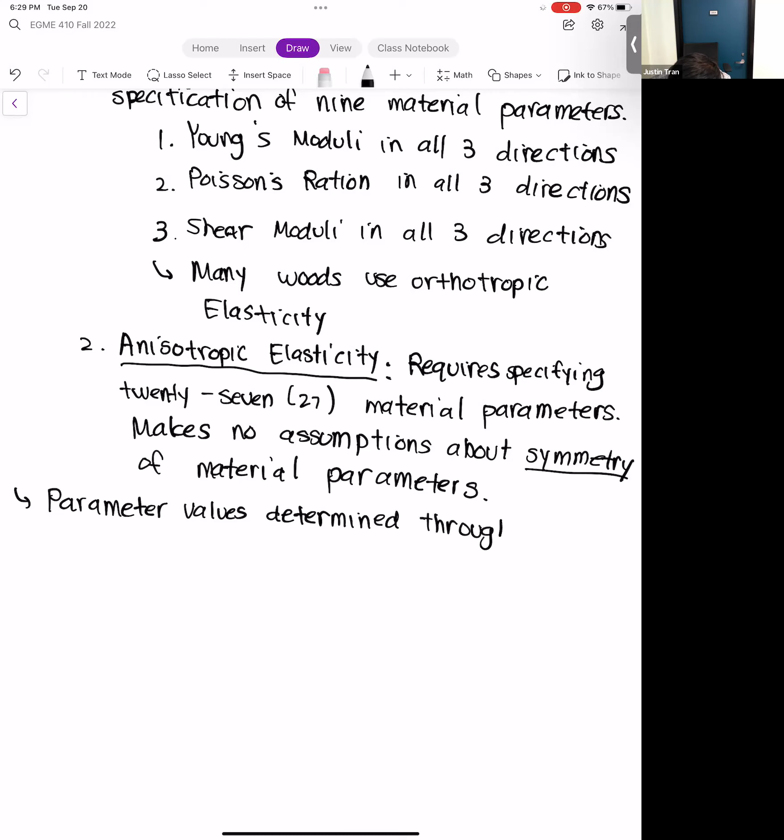You might have done tests like this in some of your lab courses - like a tension test, where you stick a piece of metal inside a machine and it pulls it apart, and you measure the relationship between force and the amount of strain you measure. There are a lot of other tests too, like biaxial testing, that scientists use to determine what these parameters are. So when you see that the Young's modulus of a material is a certain value, know that there's probably a wealth of laboratory tests that support that.

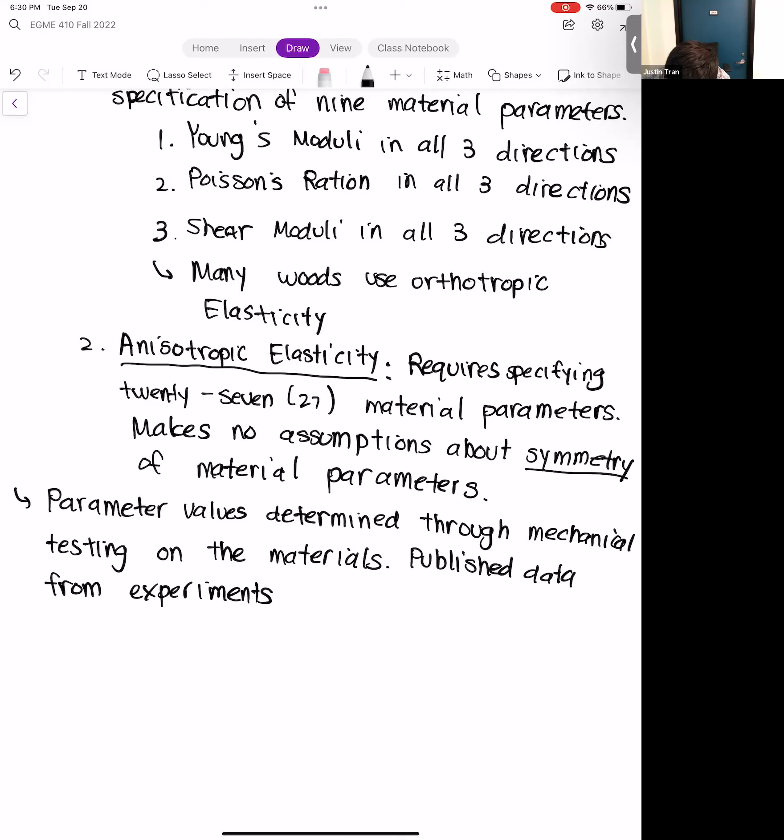At this point, there's no way for us to, for instance, look at the molecular structure of a material and determine the Young's modulus from that. Most of the time it's done experimentally - we put the material under strain and record the properties. So if you have a relatively new material, it might be hard to find reliable data on its properties, just because there hasn't been enough testing on that material to get a good sense of what the properties should be. That's something good to keep in mind.

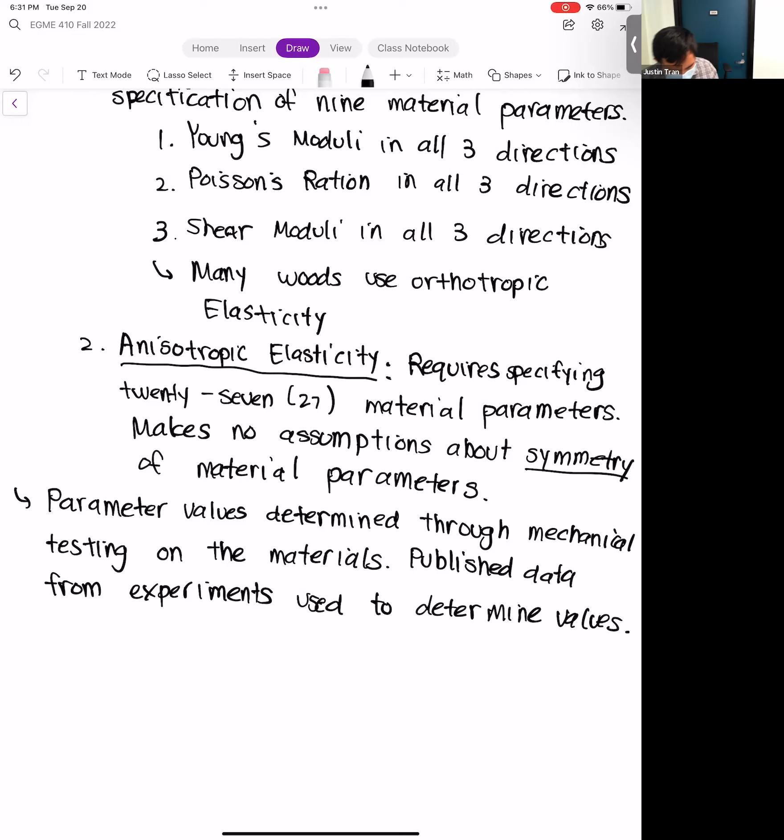Let's go ahead and move on to another type of material model out there, which is plasticity. Everything we've covered so far still belongs in the realm of linear elasticity. Even for an orthotropic material and even for an anisotropic material, you still have this linear relationship between stress and strain - it's just that for an anisotropic material, the stress in one direction is related to the strain in another direction by different parameters. So it's a bit less straightforward, but the relationship is still linear. Once you start talking about plasticity, that's when you start to break that linear relationship.

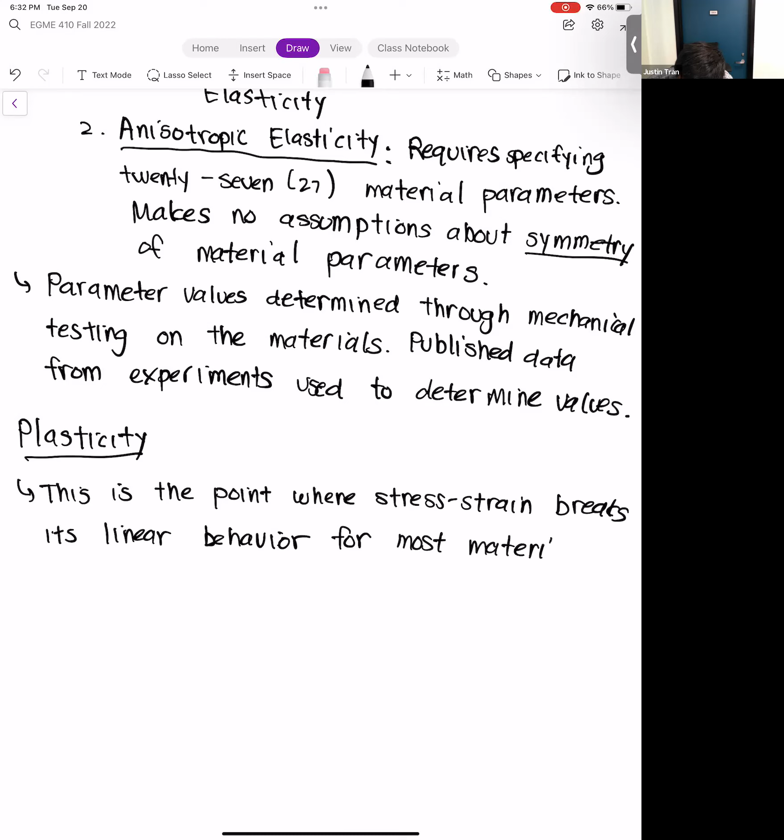The way I phrase that is kind of important. When I say this is the point, what I mean is, for a lot of materials, if the strains are kept relatively small, most of the time you observe just linear behavior. But if you keep deforming the material and the strains exceed a certain threshold, that's when you start to see plastic behavior.

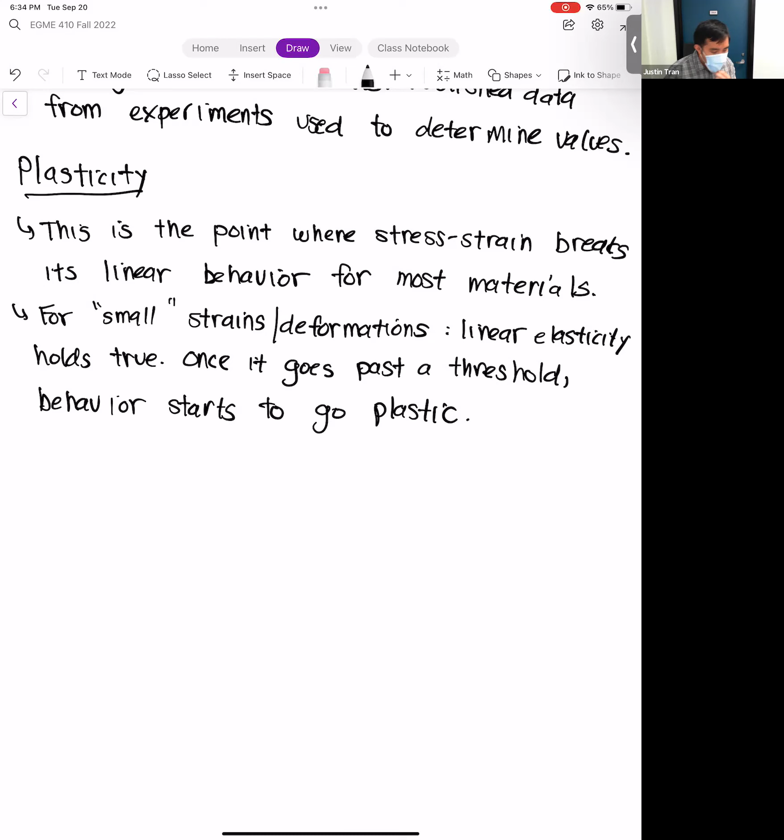So what do I mean by plastic deformation? If you're in the linear range, with small deformations, small strains, the assumption is that if you release the load, the material returns to its original shape. Let me draw that visually for you.

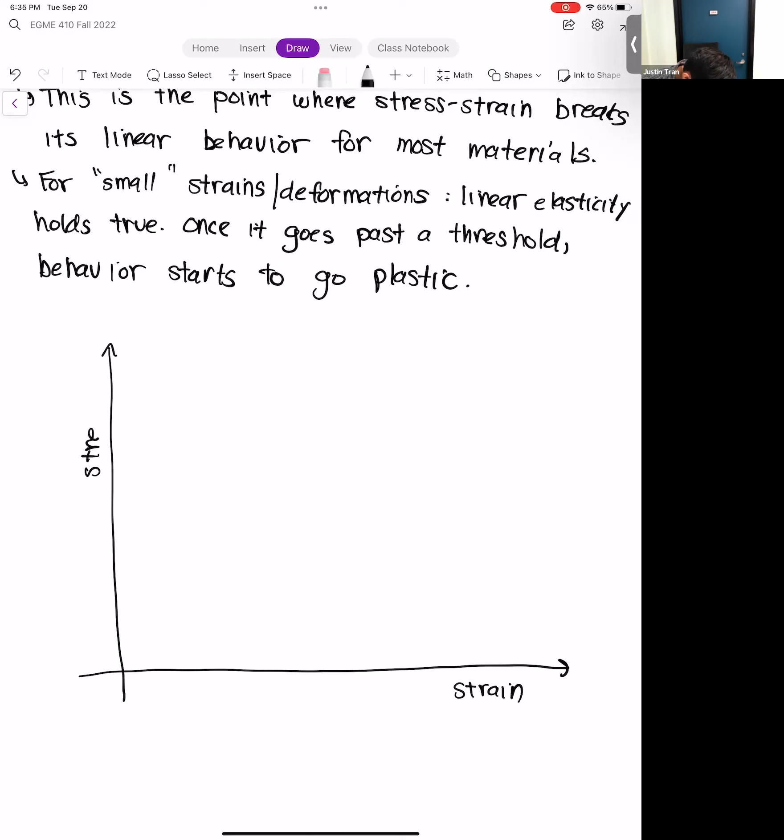Here we have our stress strain curve. Let's say we have a material with a linear stress strain curve like that. Let's define this point here: the origin, when the material is at rest. When the material is under no loads, there's no stress and no strain, so the material retains its original shape.

As the material is loaded, we start to apply loads and climb up this graph. Let's say we apply a moderate amount of loading, then the stress reaches this level right here, and that stress is enough for the material to strain by this amount.

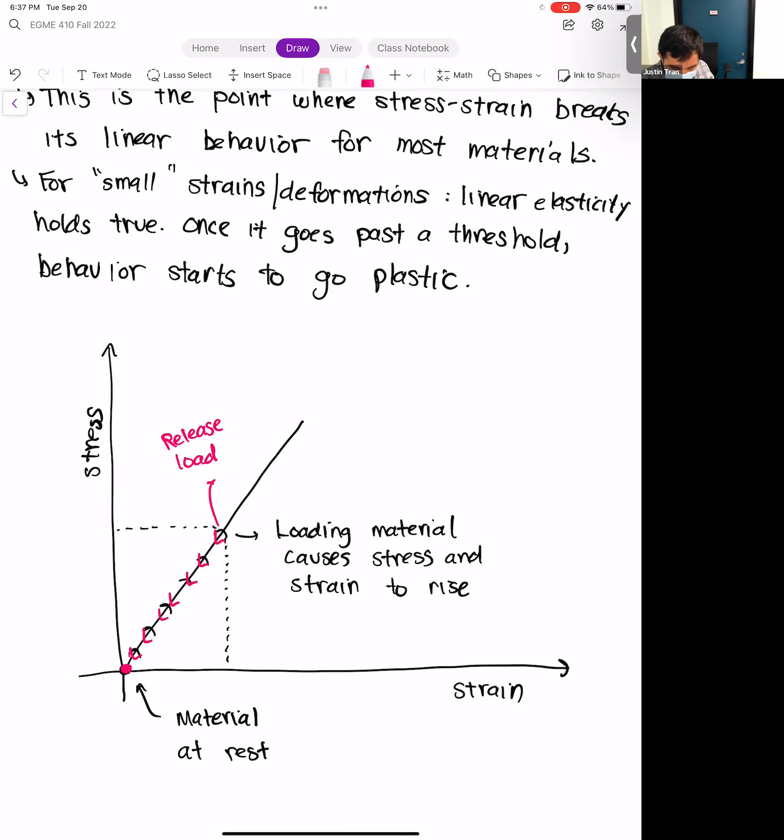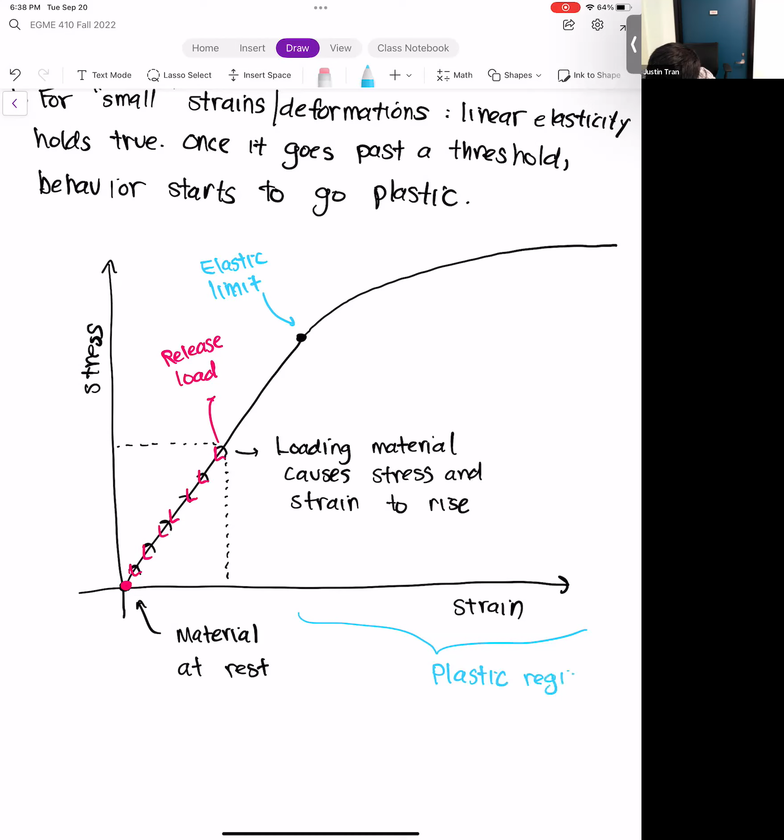But notice the way I drew this, the linear portion only goes up to a certain point, because for many materials, once you get past this point, the shape of the curve changes. This point, where the shape changes, we call the elastic limit. And this region of the curve, where the stress strain relationship is no longer linear, we call the plastic region.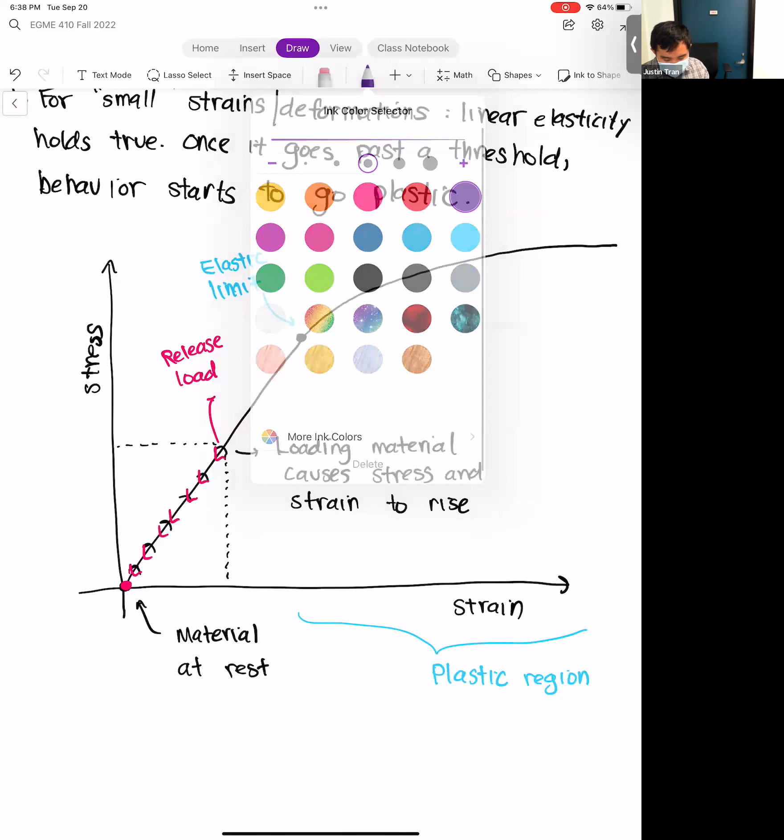Let's see what happens when we start to load a material past its elastic limit. So let's go ahead and load the material — I'm going to use purple this time. If you load the material past its elastic limit, the stress strain relationship starts changing, and you no longer have a linear relationship.

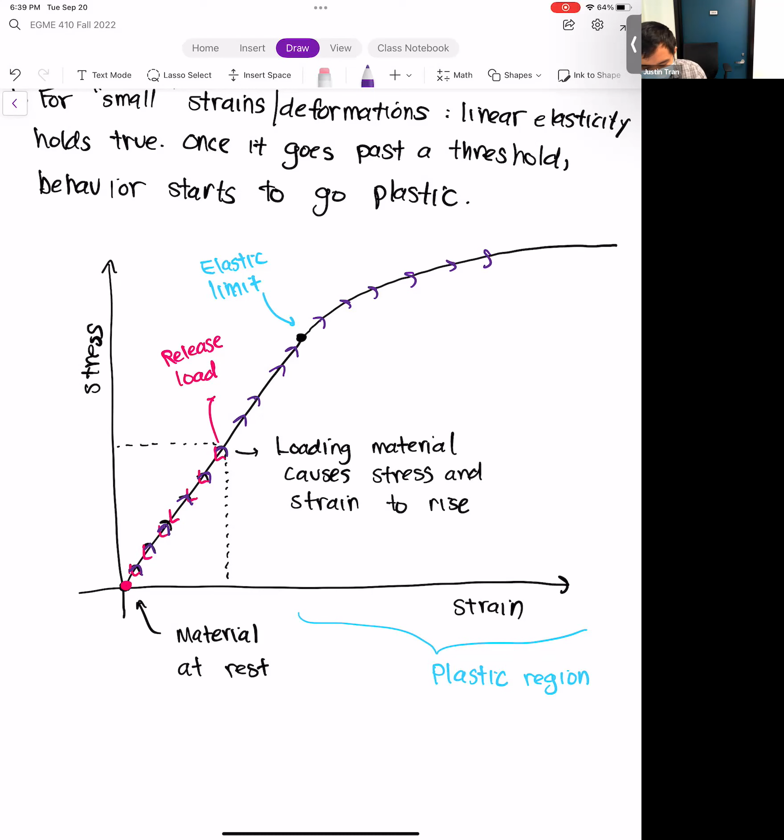Instead, the more stress you put in, because the curve is flattening, you get more strain. So it becomes easier to cause more deformation because the stiffness is reducing. The other consequence is that if you release the load once you've exceeded the elastic limit — let's say right here we release the load —

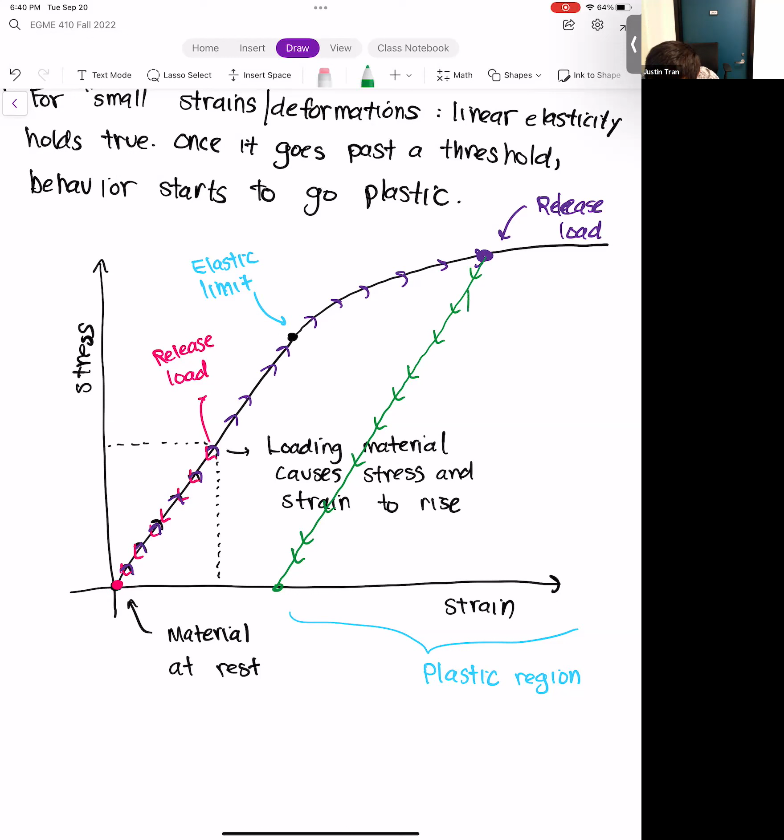we're no longer able to return to the resting state. From here, the material is going to relax, but not back to its original resting state. Whatever point the material left off on, it's going to start relaxing from there. The slope of this relaxation line is still the Young's modulus — it has the same slope as the linear region on the left, but it's offset because we've entered the plastic regime.

This point, when the load is completely released, is the new resting point. But of course, it's not the original resting point. There's been some permanent deformation that can't be undone because you've exceeded that elastic limit.

So hopefully that's a review, hopefully you've seen that before in solid mechanics, but this is just a refresher of what is meant by plastic behavior. Plasticity kind of means two things: the relationship between stress and strain changes, so it's no longer linear, and also you have this permanent plastic deformation that's always going to be there.